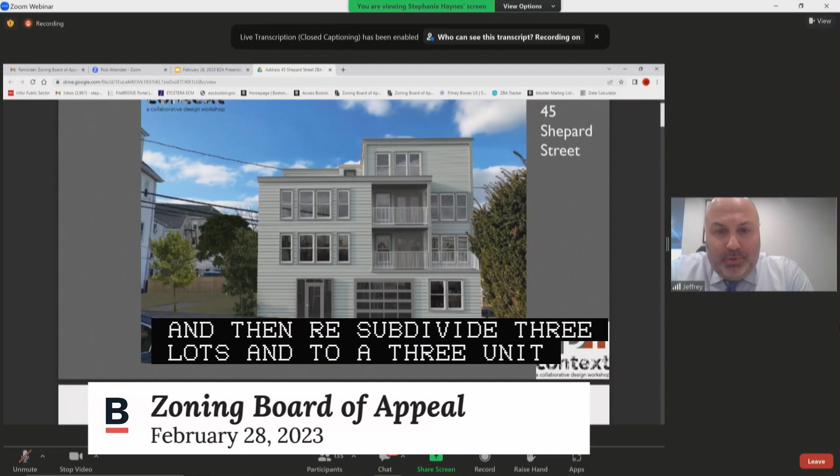What you're looking at is a rendering of a proposal to combine and then re-subdivide 3 lots and to erect a 3-unit residential condominium building at 45 Shepard Street. The unit will contain 3 units, all condo, and 5 interior parking spaces that would go along with those units, all housed on the ground level.

The particular subdistrict is a 2F-5,000. Our lot is 5,014 square feet. You can see some of the surrounding buildings — there's plenty of multifamily from 3s to residential condominiums and rental around us.

Just to get quickly into— this case is actually with a translator, so Mr. Drago needs to pause for translation.

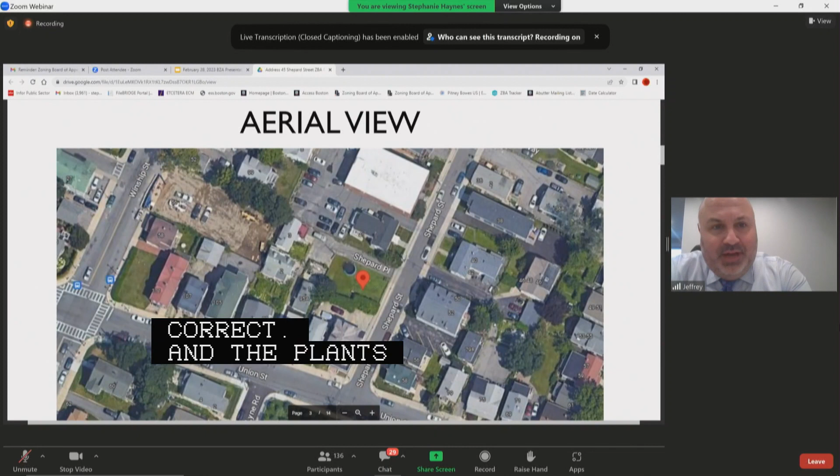The project, Madam Chair, has really been modified over time. We started at 9 and went down to 6, then down to 4, and now with community process are at 3. The plans that were submitted, the final set reviewed by ISD, show the 3 units with 5 parking spaces. Thank you. Okay, excuse me, let Terry translate.

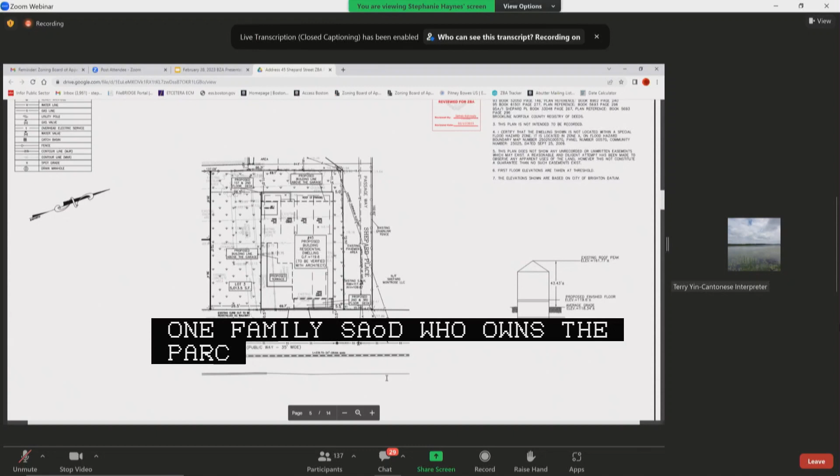If we can go to the next slides, and the next one after this — we now get into the parking area, so you can see 5 parking spaces, 3 full, 2 compact, with a 20-foot turn radius, and an elevator on the ground level.

I think this— Terry, sorry, the other way around: 3 full, 2 compact, Terry.

Is it 3, Terry, full? Yeah, 3 full. Okay, you said 2 full.

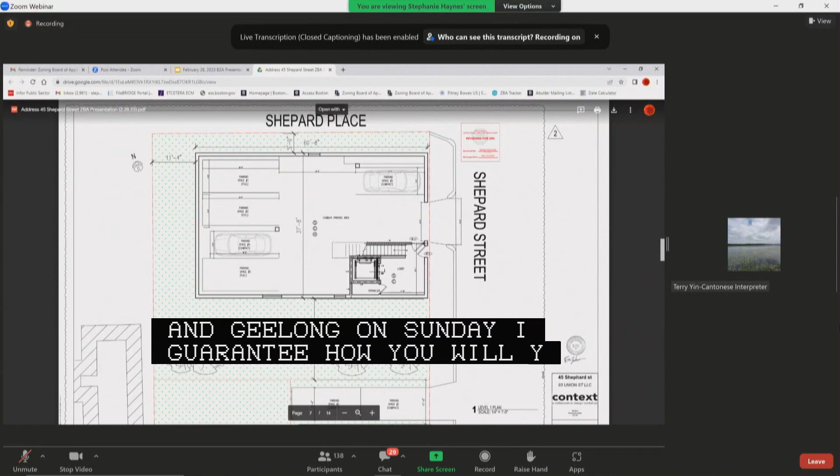3 large parking spots and 2 small ones. It's important to show this slide because as we worked with Councilor Breadon's office in the community, we modified our rear setback to have 11 foot 4 inches and 21 feet on the left side of the property, giving that area as green space.

I'll run through these quickly. The second level houses Unit 1, 1,665 square feet, 3-bedroom with a front deck. As we go up to levels 3 and 4, those are bi-level units housing bedrooms.

On level 3 with a deck, Unit 3's bedroom with 1 deck. Levels 3 and 4 are 2-story units for Unit 2 and Unit 3, each with a deck. Finally, going up to the top floor, through the process we removed the roof deck.

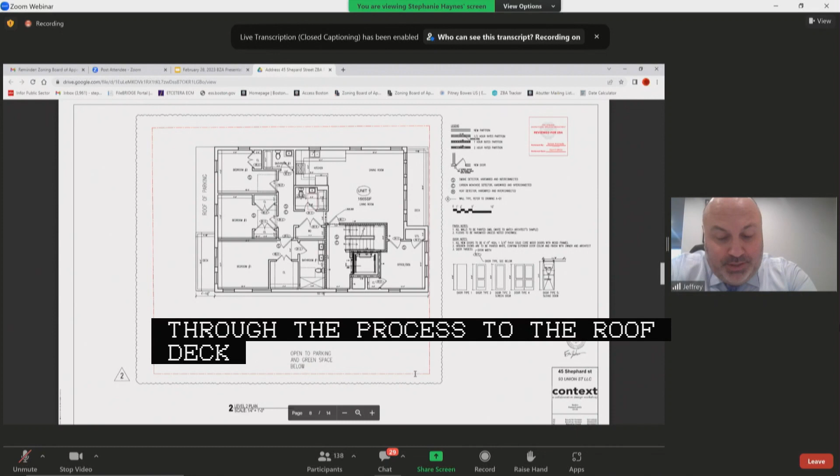Level 4 just has a walkout terrace area, housing Unit 2 and Unit 3's upper level, which include additional bedrooms in those terraces. The 4th floor roof is walkable and usable by Unit 2 and Unit 3. I'll quickly go through the violations, Madam Chair.

This is a 2F district. We are proposing 3 units, although there are plenty of examples of multifamily 3s in the area. This is a 2F zoning district with many multifamily buildings nearby. The FAR allowed in this area is 0.8.

We're proposing an FAR of 1.27. For height, we are at 4 stories at 42 feet 2 inches. We actually lowered that height from our higher point; it was 46 feet going through the process.

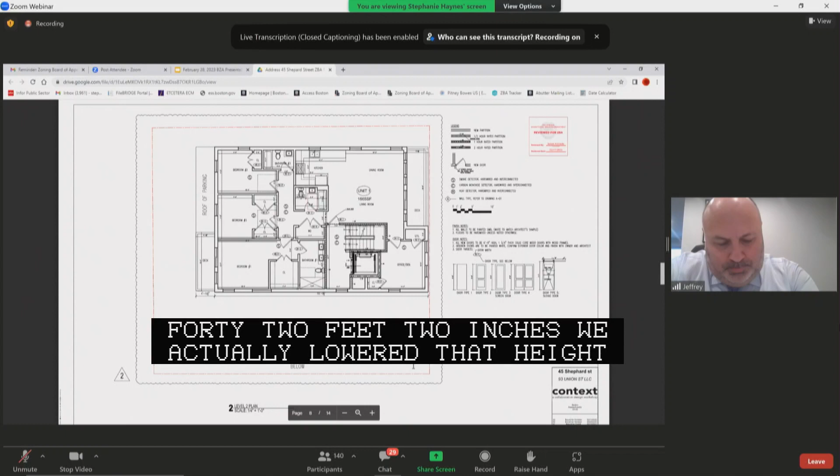Required side yard is 10 feet; we have 5 on one side and 21 on the other, with extra space for greenery. Our rear yard, although 40 feet would be required, is at 11, close to most buildings in the area if not more. We've worked with the councilor's office and abutters to agree to provide full screening and buffering in the rear and sides with landscaping and fencing.

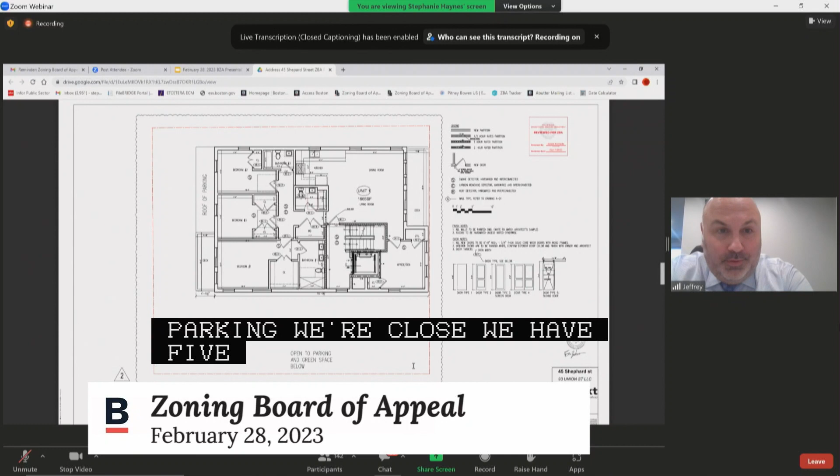The rear yard requirement is 40 feet; we're working with the councilor's office to provide screening, buffering, and green plants in back. Finally, parking: we're close, with 5 spaces for 3 units, but 5.25 would be required under the code. I'll pause here, and I also have Eric Zackerson with me, the architect who designed these plans in context.

Thank you, Mr. Drago. Mr. Collins, have you reviewed the plans?

Sorry, Mr. Collins, do you have any questions about the plans? I do not. Plans are adequate.

Thank you. Is Mr. D'Amico on? Any questions on the parking?

Madam Chair, I just want to confirm the parking is accessed through a front yard curb cut, is that correct? A couple more questions: are these condos or rental? Can you go over access to the roof deck? Sorry, let's let the interpreter translate.

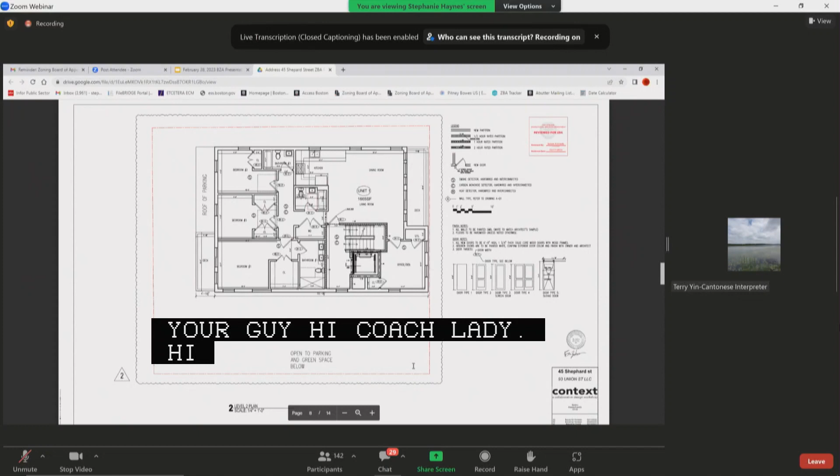I'll take these one at a time. The garage is accessed through a curb cut created in the front of the building next to the main entrance. As for the terrace, since we took the roof deck off, it's just a walkout from the top floor bedroom through an access door. And condos or rentals? This is condo, for-ownership homes.

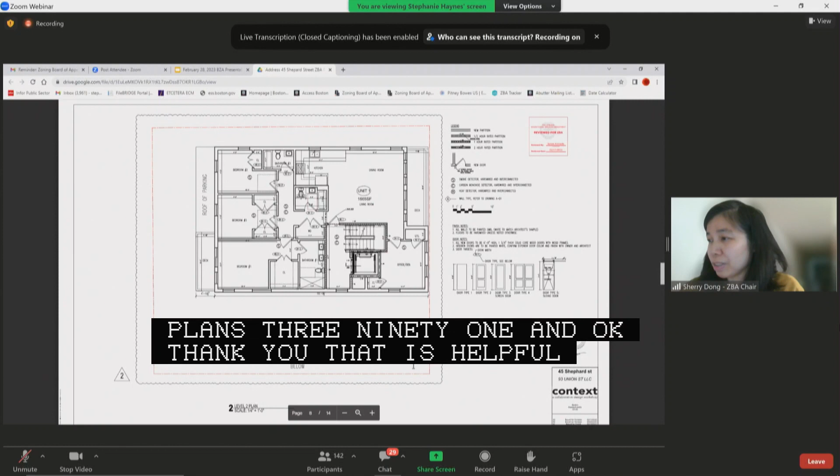I know someone usually asks about BPDA, so I'll note that BPDA provided a recommendation based on 6 units. I don't know if Mr. Hampton is on and wants to comment. Thank you, Madam Chair, members of the board. Yes, our recommendation was made 4 months ago, so obviously over time the plans have changed. It was recommended for denial under the 6-unit plan.

So just to let folks know, that was based on 6 units, and now we're talking about 3 units. Are there any other questions from the board?

Madam Chair, Mr. Drago, I would like to ask if you can share the specific reason why the project lost 3 housing units. Excuse me, Ms. Valencia, we actually went through about a 2-year process.

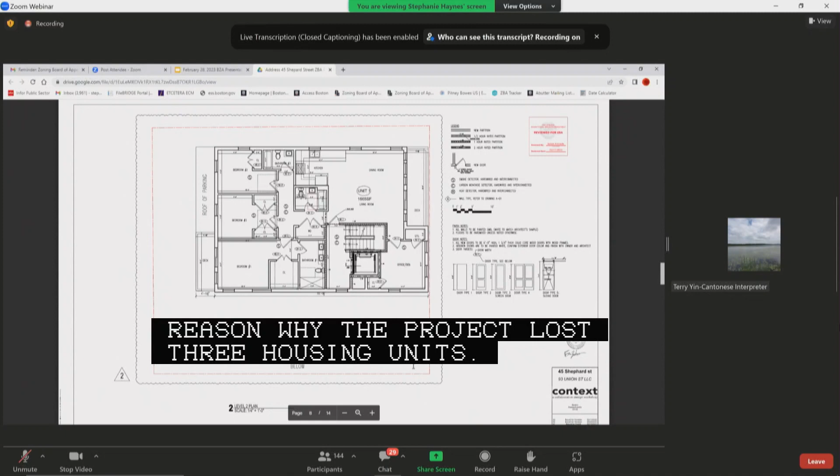I just want to translate. Oh sorry, okay, let me briefly translate.

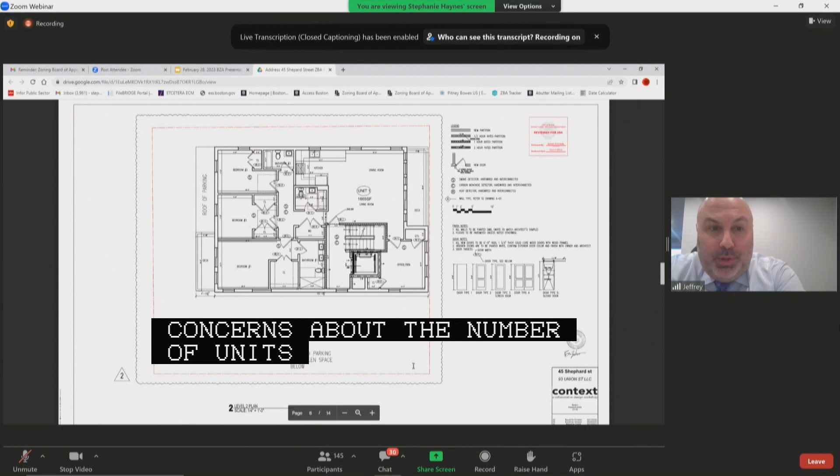Go ahead, Mr. Drago. Thank you. Ms. Valencia, that's a great question. We did want to go forward with 6 units, although we had multiple meetings over almost a 2-year period with our neighbors, abutters, the counselor's office that had concerns about the number of units on this lot. So in working with them, that's why we reduced the project down to 3, which they felt was more fitting to the area. Okay, so with that, may I open it up to public testimony?

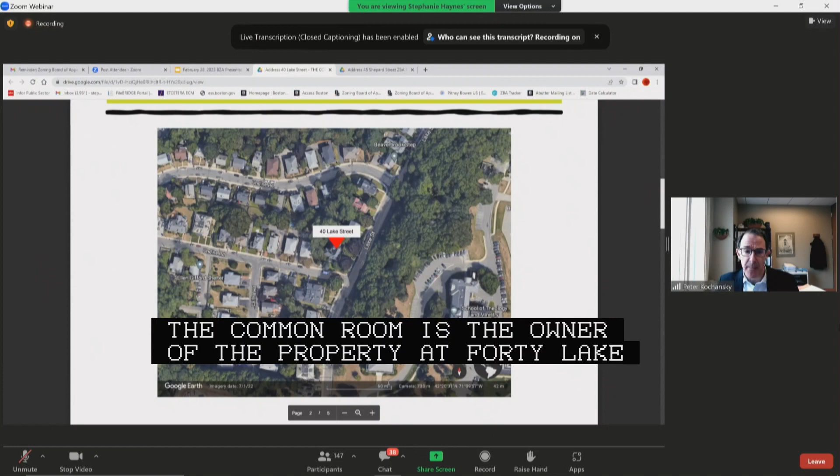Of course, so I'm here representing our client, The Common Room. The Common Room is an organization dedicated to providing social opportunities for young adults with autism. The Common Room is the owner of the property at 40 Lake Street. I'm joined by Tracy Stoll, the executive director, and Tom Harrington, a board member. We're really glad to be here this morning.

We were first before the board on June 7th of last year. There were a number of good questions about the project from abutters and others in the neighborhood. Several neighbors, including Secretary Galvin, who lives right next door on Lake Street, recommended a deferral, and the proponent and the board deferred at that time. Since then, we've worked really hard to answer all the neighbors' questions, primarily around the specific use of the building, traffic concerns, and the approach to parking and drop-offs. Among other things, we hired a transportation consultant, Howard Stein Hudson, to study the traffic generated by the project.

This has been, at this point, a very thorough community process. We've had 3 neighborhood meetings hosted by the mayor's office. We've presented twice to the Brighton Allston Improvement Association and other stakeholders. So after that work and outreach, we think many of the neighbors are a whole lot more comfortable with the project than they were last year. I don't know if Secretary Galvin is able to attend the meeting today, but we understand that we've addressed the issues that he raised to his satisfaction.

So before I proceed, I just want to note that we have agreed to a number of conditions to the zoning relief. I can circle back to those at the end if that's the best way to do it, but I want to make sure we get those on the record. So launching in, if you could flip back to the previous slide. So here's the context: 40 Lake Street is on the corner of Lake Street and Undine Road. It's across the street from BC's School of Theology, and just to the south is Commonwealth Avenue. Next slide, please.

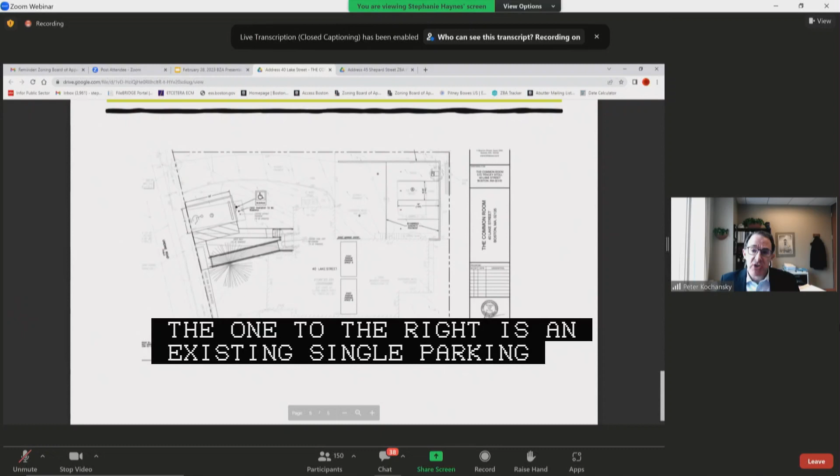Here's the parking plan. There are a total of 7 spaces on the property. There's room for 4 spaces in the back parking area, plus a garage within the house off the back parking area with an additional 2 tandem spaces, which the organization plans to use for the caretaker.

As mentioned, there's that existing single parking space, and the proposal is to modify it to maintain it as an accessible parking space. The change in use requires an accessible route from an arrival point into the building, and the existence of that space allows us to implement accessibility best practices, connecting it to a ramp on the way into the house.

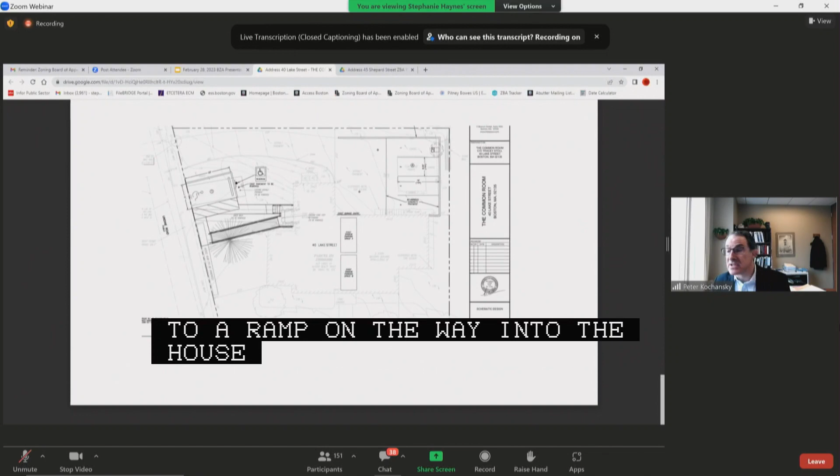We've heard from some neighbors about concerns regarding the ramp design. The common room is still studying it, but in any event, the organization has hired a landscape architect to develop first-rate landscaping plans, with the goal of making that side of the house look terrific.

To summarize, we really don't think this is going to generate any significant traffic or drop-off issues. This is a small organization, and we have the ability to manage parking and drop-off as we go if it causes any concerns in the neighborhood.

Thank you. Are there any questions from the board? I'd also be glad to read into the record the conditions, if that's helpful.

Are there any questions, Mr. Collins? Have you reviewed the plans? I have—plans are adequate. Any other questions from the board? Okay, with that, we can come back to you as needed, but let's take public testimony.

Good morning, Chair, members of the board. My name is Frank Mendoza, Brighton Liaison for the Mayor's Office of Neighborhood Services, here to testify to the applicant's completion of the community engagement process. They met with the Brighton Allston Improvement Association and had more than one abutters meeting.

While we did forward a number of letters of both support and opposition to the board, I'd also like to note there were some concerns with pickup and drop-off, and concerns about the handicap ramp as configured, particularly that it might remove trees and shrubs existing on the plot. Residents also hope the building will fit in with the character of the residential neighborhood. I know Annabella Gomes from the Brighton Allston Improvement Association is on and would like to testify. With that, we will defer to the judgment of the board.

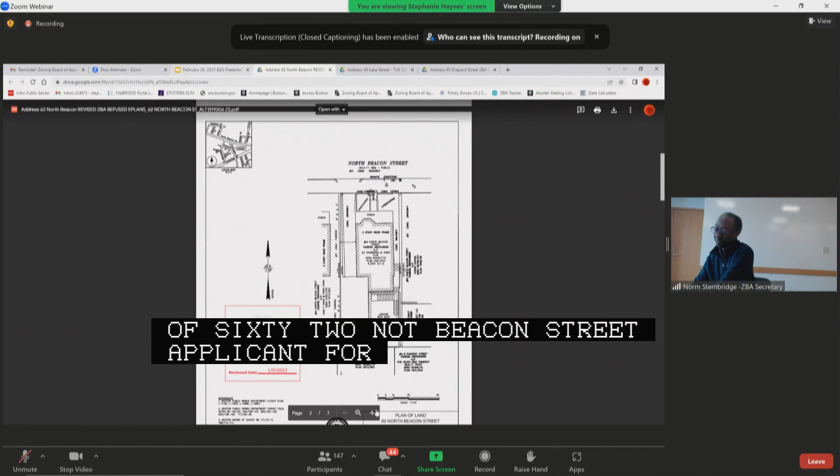Yes, applicant is present. Can you hear me? Yes. Can you please state your name and address? Yes, my name is Amenyonah Bossman. My address is 14 Stonecrest Road. I'm the general contractor for client at 62 North Beacon Street.

Okay, briefly walk us through the violations and the proposal. Thank you. So the violations, and we were just meeting here last year, so the violations that we had were the height, and there was questions on whether or not we had a second egress door, as well as the ceiling height in the ground floor level.

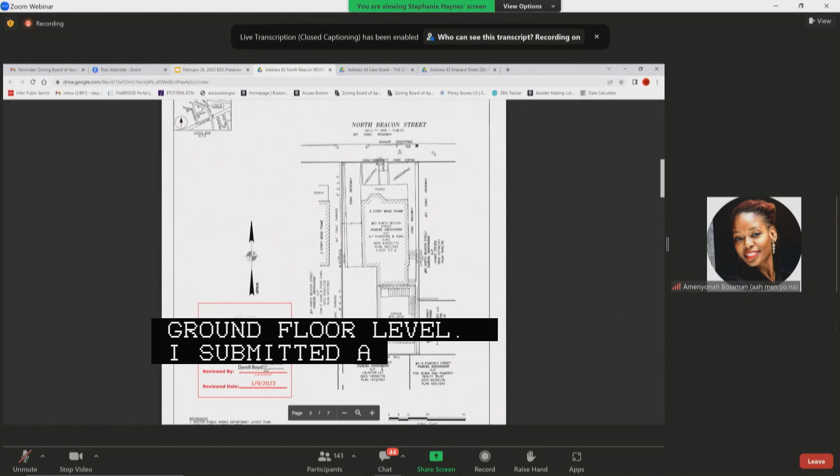I submitted a set of drawings in December, providing the clarification on ceiling height and egress door. We met back with the community, did some revisions, and so the new drawing shows, instead of an additional dwelling unit, which was at the ground floor level, that's now a 1-bedroom handicap accessible unit.

There is clarification, if you can see. Oh, I can't zoom in, okay. There's clarification on the ceiling height, which is 7.6.

You'll also see on the second drawing, you're in the demolition drawings right now. If we go to the plan, the red clouded area is what we had in question for the last meeting. What you're looking at, if you zoom in, you'll see there's a utility room and there's two forms of egress.

One is the entrance on the side that you see going into the foyer where you'll have access into the utility room, or you'll have access into the ADA unit. And if you go around the back, you'll also see a secondary egress access.

What was added is the excavation for the ground floor, and that's where you see the concrete. That's the concrete patio along with the handicap rail.

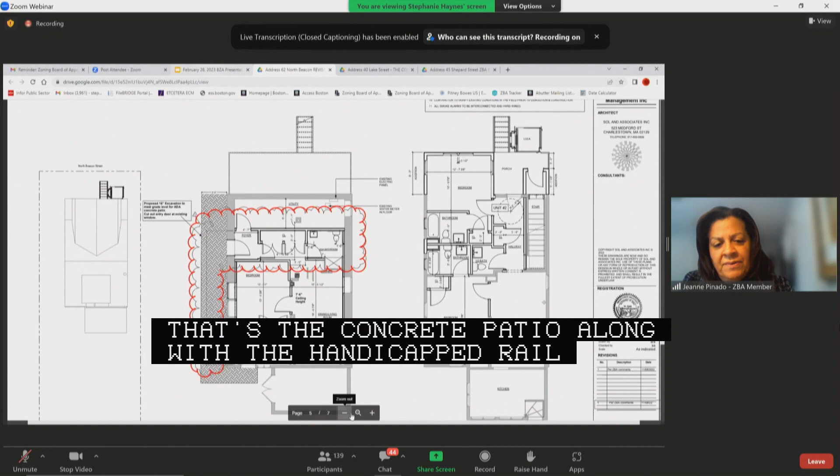Madam Chair, can the applicant just go over the variances, what's required and what's being proposed? Yes, that would be helpful. We don't need a rundown of the entire, all your slides. Can you please focus on the variances needed?

The applicant is muted. Yeah, sorry about that, I had some background noise. So the variance that we're looking for is to add the ADA ground floor unit. We're citing FAR, multifamily use, forbidden off-street parking, loading.

Can you address those violations? So the multifamily uses, we're in a single family residential district. We're asking for the variance to build the single family into 4 units.

We covered parking there. We have a driveway for parking, and there's also street parking. We do not expect to add additional parking issues on the street. Are these condos or rentals? These are rental units. And how many bedrooms are we talking about per unit? We're talking about roughly 3 bedrooms per unit.

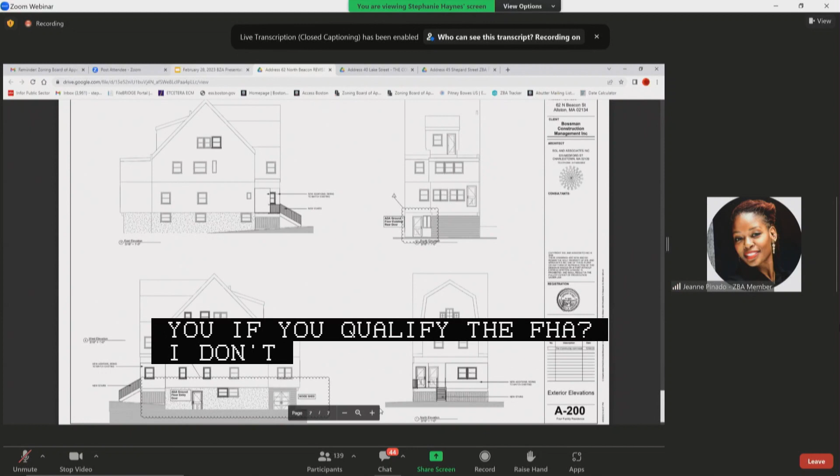Can you address FAR? Can you clarify the FAR? I don't have my paperwork with me. No. Just clarify what's required and what's being proposed. What's required? And what's being proposed, yes. What's being proposed is a single-family conversion to a 3-family unit.

She's asking about the FAR violation. Your floor area ratio, so what's the square footage of the building, the livable square footage in the building? Let me pull up my drawings, because it's not shown on yours.

Is it on the plan someplace? Yeah, it's on the plans. I'm just looking for it. Hold on a second. So are you building out the basement and attic as well as livable space? We're not building out an attic.

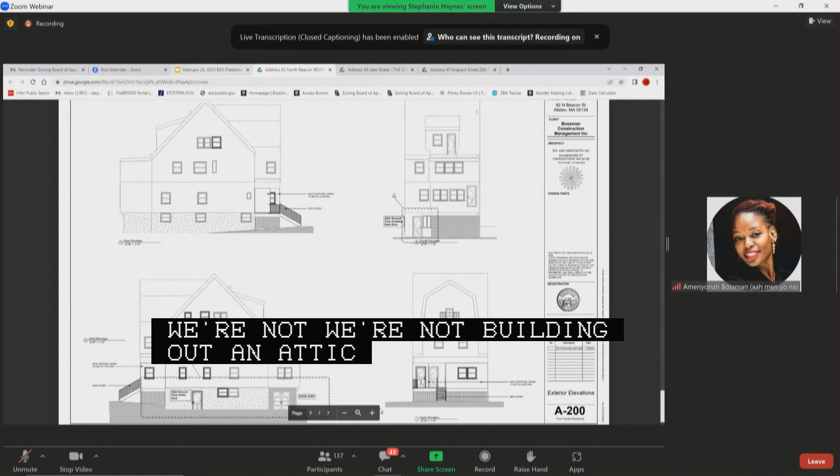Okay. But what I have, the violations, yeah, I see the off-street, I see the forbidden use and the floor area ratio. We didn't have any violations on the FAR, but I'm looking to see where it's located in our drawings.

So I think we had some notes on it. Well, it's noted as a violation. That's why we're asking. Yeah, so it looks like 4,000 square feet is your FAR, your square footage. And your, hang on one second. What size is your lot?

Hang on one second, it's just gonna take me a second to bring it up, but it's one family, 3,000... I think the question is, can the applicant respond to that? Oh sorry, well I had all this stuff already on the drawings, so I'm just trying to go through my drawings. Madam Chair, if I may, an allowable FAR for that zoning district is... that would help us, I think.

So 0.5 is what's allowed. And what are they at? So right now I'm looking at 4,000 square feet. So yeah, your allowable square footage would be 2,000.

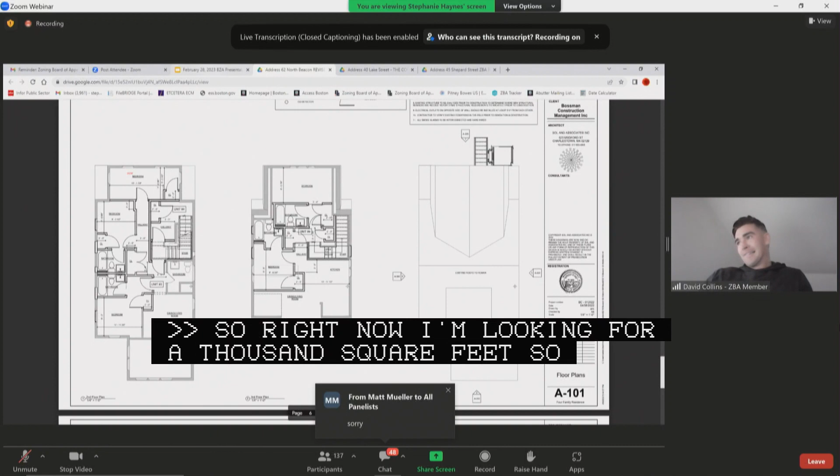Does that answer your question, Ms. Pinado? Yeah, it sounds like you're proposing 4,000 square feet, your allowable square footage is 2,000. Is that right? Well yeah, but I'm also looking at the survey drawings. It looks like the existing is 4,000 square feet.

Okay, so this is an existing building, we're just actually going into the basement. Correct. So if you look at the survey, it's existing precondition. Okay, I get it. We are not adding an inch in the building. It is the existing building which we are just converting the floors into units.

That's all. So you're converting it from a one family to a four family? I got you, right, because there's 3 different levels. Okay, and that's according to the city's website, they have almost a 3,000 square foot house now.

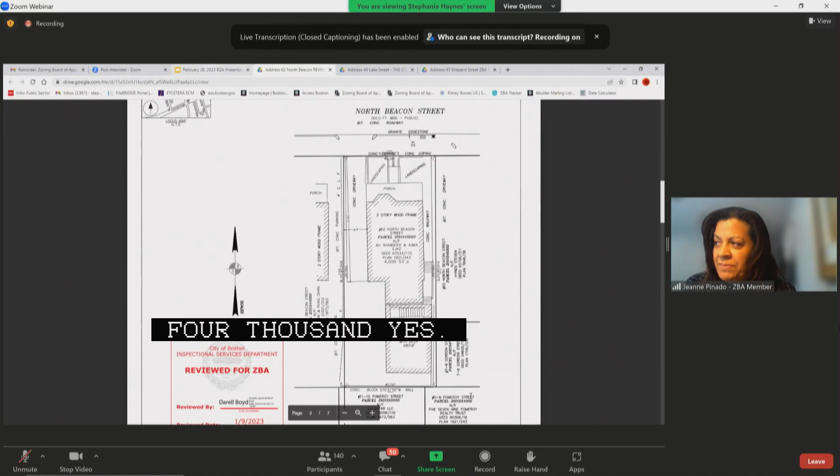And it's a walkout, it's accessible basement, so it's actually a roll-out basement unit? Yes, it is. It is actually not a basement, it is on the ground level. Okay, right, okay, all right, thank you.

Thank you. Just to add, we have already covered 3 parking areas, 3 parking garage. A 4th could be converted, but we are using it as a utility room, and we have our own driveway, and at least 4 car parkings in the driveway.

Mr. Stembridge, any notes from Mr. D'Amico on parking? On this case, Madam Chair. Okay, may I have public testimony?

Yes, absolutely. Good morning, Chair, members of the board. Frank Mendoza here, Mayor's Office of Neighborhood Services, Allston Brighton Liaison. We did have an abutters meeting for this project. They also reached out to the Brighton Allston Improvement Association, but did not wind up being able to testify before them. As a result, the Brighton Allston Improvement Association, represented today by Annabella Gomes, I believe, and the participants voted to oppose the project. They did also do some outreach with the Allston Civic Association. However, citing a lack of proper notification, the Allston Civic Association sent a letter this morning to the board stating that they would defer to the judgment of the board. Beyond that, we would like to also defer to the judgment of the board in this matter.

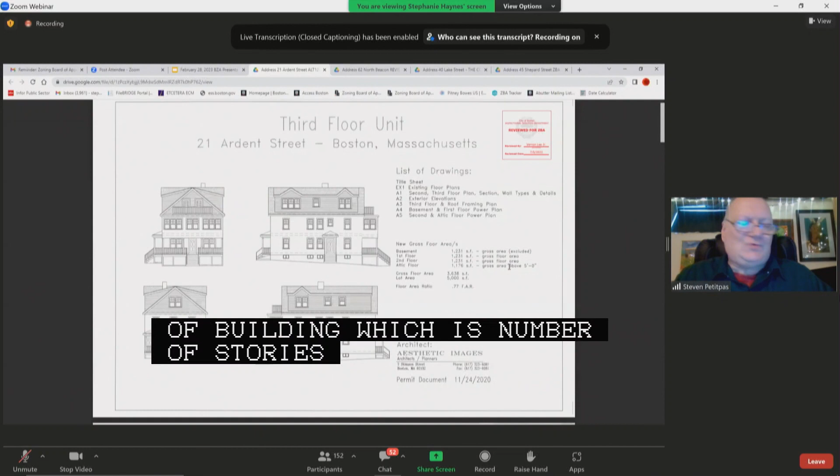The violations for this particular project are floor area ratio, height of building, number of stories, front yard, side yard setback, and off-street parking. This is an existing 2.5-story non-conforming two-family building. The side yard and front yard setbacks are existing. The project is not going to further violate that.

We are proposing to take an existing unused attic space and convert it into a third unit, thereby increasing the floor area ratio by 1,176 square feet, which is really an actual increase of 500 usable square feet in comparison to what's there now. In addition, all 3 units will have separate entrances.

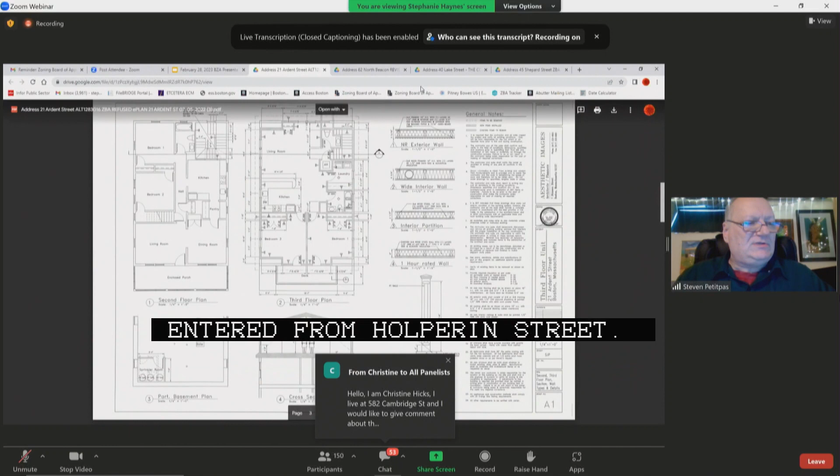First floor is entered from Ardent Street, second floor is entered from Colberg Avenue—those are the existing units—and the third unit will also be entered from Colberg Avenue. In addition, the off-street parking currently is 2 parking spaces. We're not proposing to increase that because we just don't have the physical land area to do so.

Any questions? Mr. Collins, have you reviewed the plans? Yes, I did. Plans are adequate. Okay, any questions from the board?

So just to confirm, there's really no external changes, it's interior. Well, for the existing 2 units, there are no internal changes. We are providing a third floor unit. Right, I'm saying there's no external changes. Oh, yes, there is. We're providing dormers at the attic level in order to create that third level. That's where the additional 500 square feet of usable space comes from.

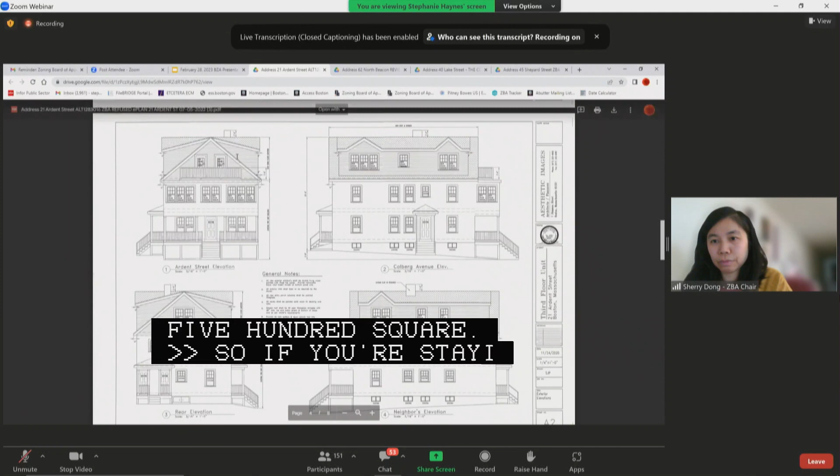Okay, any other questions from the board? Okay, may I have public testimony? Yes, Madam Chair, members of the board, Connor Newman with the Mayor's Office of Neighborhood Services. At this time, the Mayor's Office would like to defer to the judgment of this board.

Some background information on the community process. Our office held 2 abutters meetings. During the first meeting, there were some concerns over the loss of sunlight from the dormers, as well as concerns about parking. As I indicated, we had a second meeting where 2 direct abutters were in attendance, and it sounds like that meeting was very productive.

We've received 16 letters of support and 1 in opposition, and it's been indicated to us that direct abutters are mostly in support of this project. With that, we defer to the judgment of this board. Thank you, Mr. Newman. Madam Chair, Mr. Stembridge, yes, we have letters both in support and opposition to the project.

Madam Chair, I have no raised hands. Okay, with that, may I have a motion? Motion to approve. Sorry, go ahead. Motion to approve with BPDA design review. May I have a second? Second. Mr. Shepherd? Yes. Mr. Valencia? Yes. Mr. Stembridge? Yes. Mr. Collins? Yes. Ms. Panado? Yes. Ms. Olivier? Yes. The chair also votes yes, motion carries.

Good luck. Thank you.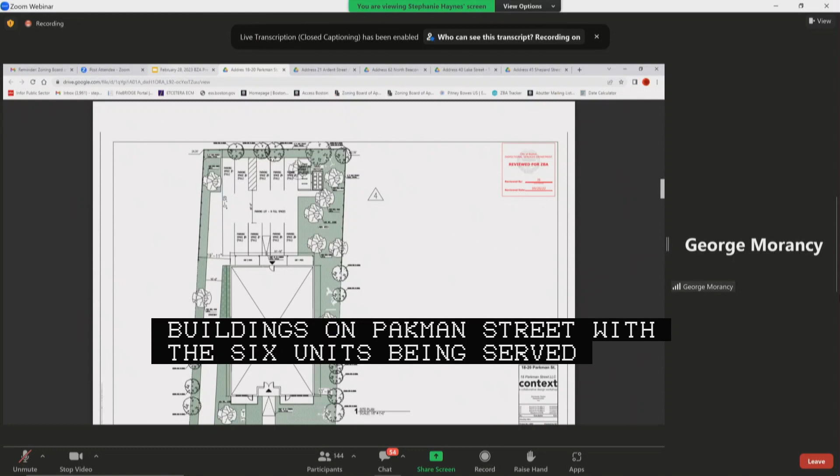with the 6 units being served by rear parking area for 9 motor vehicles. In response to concerns expressed at community meetings dating back, I believe, to 2019, my clients have gradually reduced surface parking and reduced the proposed unit count from 14 to 9 and now to 6, and increased usable open space on the site as a result.

There's now a few thousand square feet of true green open space on the site plan, as well as approximately 1,000 square feet of unit deck and patio space for the 6 proposed units.

As I mentioned, the site is nearly 15,000 square feet. As plans show, there's a 13-foot, 4-inch front yard setback with a landscaped lawn, a left side setback of 19 feet, 11 inches, a right side setback of 13 feet, 8.5 inches, and a rear yard setback of 65 feet.

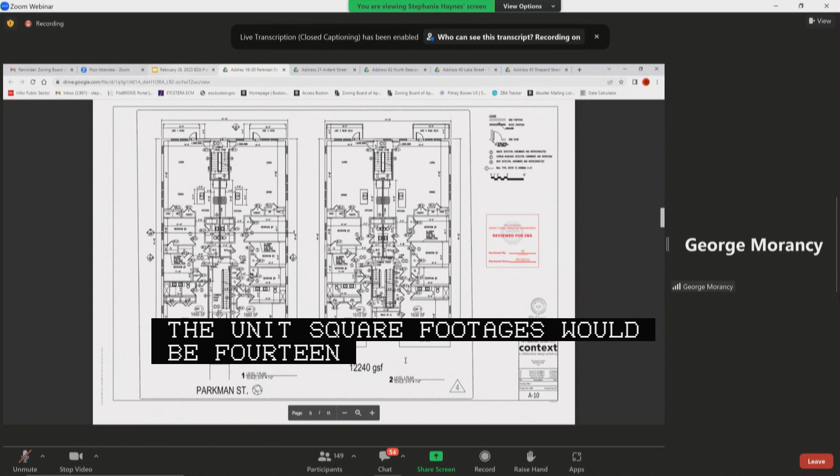Each floor of the building would have 2 side-by-side units, one being a 3-bedroom and one being a 4-bedroom unit, making these condominium units ideally suited to families. The unit square footages would be 1,490, 1,510, and 1,600 square feet for the 3-bedroom units, and 1,880, 1,930, and 1,930 again for the 4-bedroom units.

As to the requested zoning relief, there are 4 cited violations. Primary among these is the use violation, as a 6-family dwelling is a forbidden use within this 2F 6000 subdistrict, which is the present site here of a 3-family dwelling.

There's also a violation for excessive floor area ratio. The maximum FAR here under zoning is 0.4, and this building would be at 0.81.

A mitigating factor in support of these requested variances is that the lot size here, at nearly 15,000 square feet, is one of the largest lots on this street. Aside from the Jehovah's Witnesses Hall at 29 Parkman Street, it is by far the largest lot on the block. 85% of the other lots on the block are no more than half the size of this lot.

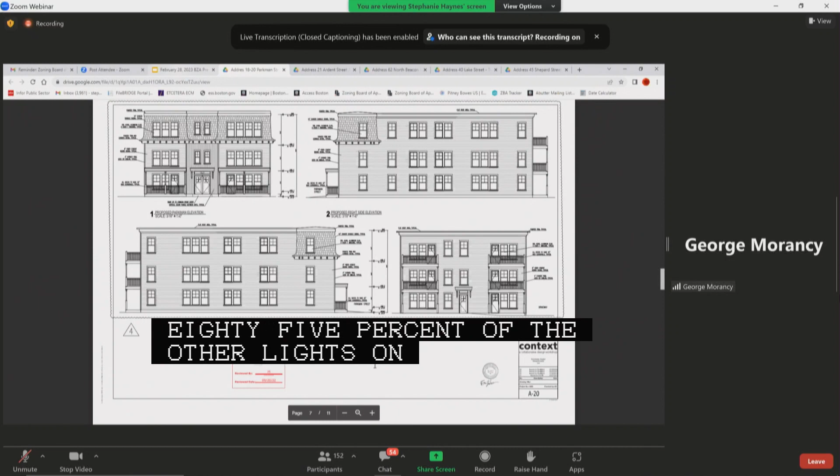Despite its large size, most of the lot will be uncovered by the proposed structure, and the proposed parking area has been reduced to a reasonable count of 9 spaces for 6 units.

There's a cited height violation. The height limit here is 2.5 stories and 35 feet. This building is 3 stories and 33.5 feet tall. So this is a story height violation only, with the building being approximately 2 feet under the maximum vertical height limit under zoning.

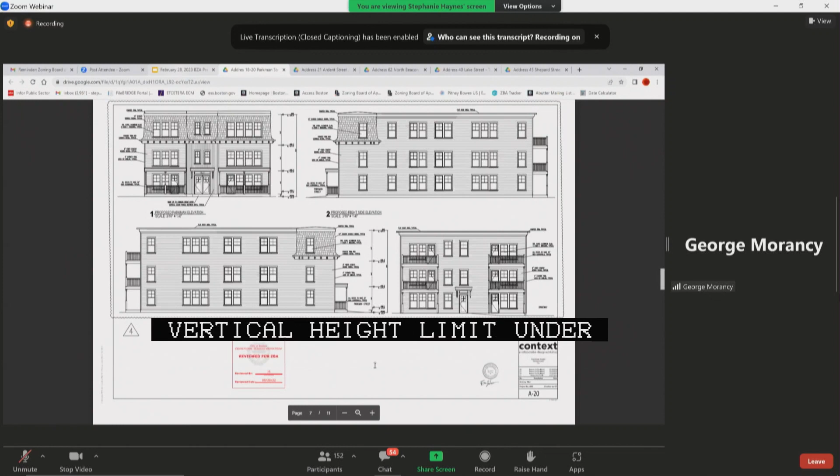Finally, the 4th cited violation is for compliance with the prevailing modal front yard setback of the street. This building's setback from Parkman Street was designed to complement the setbacks of the nearest buildings on both the left and the right, and as mentioned, allows for a generous landscaped front yard area over 13 feet in depth.

With that, Madam Chair, I'll pause and take any questions that board members may have.

Thank you. Mr. Collins, have you reviewed the plans? Any questions or concerns? Mr. Collins? Any other members of the board with questions?

No, the plans are adequate. I have reviewed them. Any other questions from the board?

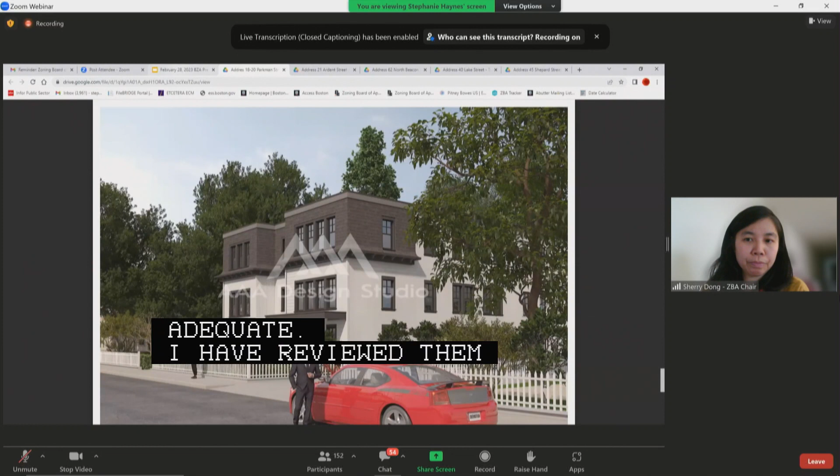Madam Chair, I have a raised hand. Okay, with that, let's take public testimony.

Okay, Brian, go ahead and state your name and address, please. Hi, Brian. Brian, are you here to speak? Oh, I'm so sorry, I need to fix the name. I don't know why it always changes my name. But my name is Ayemide.

Sorry, real quick, my name is Kevin Tran from the Mayor's Office. Good morning, Madam Chair, members of the board. Kevin Tran with the Mayor's Office of Neighborhood Services.

This project has gone through multiple iterations the last 3.5 years and through 3 abutters meetings hosted by our office, decreasing significantly from its inception at 14 units to presently 6. We have received letters of support from members of the Dorchester community for prior proposals. The Fields Corner Civic Association has written a letter of support for the project. The St. Mark's Area Civic Association has written a letter of opposition. There are numbers of abutters who have signed a petition in opposition, and also a number of abutters in support. At this time, our office will defer judgment to the board.

Brian, go ahead. Sorry about that.

No worries. Good morning, Madam Chair, members of the board. My name is Ayamide Owoyo from the Office of District 4, Councilor Brian Worrell. And in regards to 18 to 20 Parkman Street, with 52 gathered letters of opposition and no significant changes, the council would like to go on record deferring to the discretion of the board on this particular project.

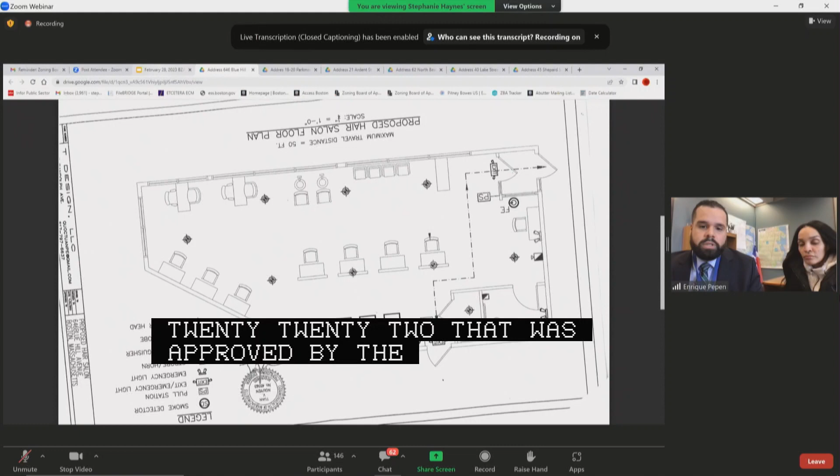The project here is changing the occupancy to a hair salon at the referenced address. The applicant is the owner. She's gone through the process, has the plumbing permit, the electrical permit, and also received a letter of support for a temporary change of occupancy back in November 8th of 2022, approved by ISD. This used to be a Metro PCS store, and she's converting it into a hair salon. She's not changing anything on the outside, and as you can see, this is the layout of her salon.

Thank you, Mr. Pepen. Any questions from the board? Seems pretty straightforward. May I have public testimony? Yes, Madam Chair, members of the board, Connor Newman with the Mayor's Office of Neighborhood Services. At this time, the Mayor's Office is unaware of any concerns in the community. We'd like to defer to the judgment of this board. Any other raised hands, Francis? No raised hands, Madam Chair. With that, may I have a motion?

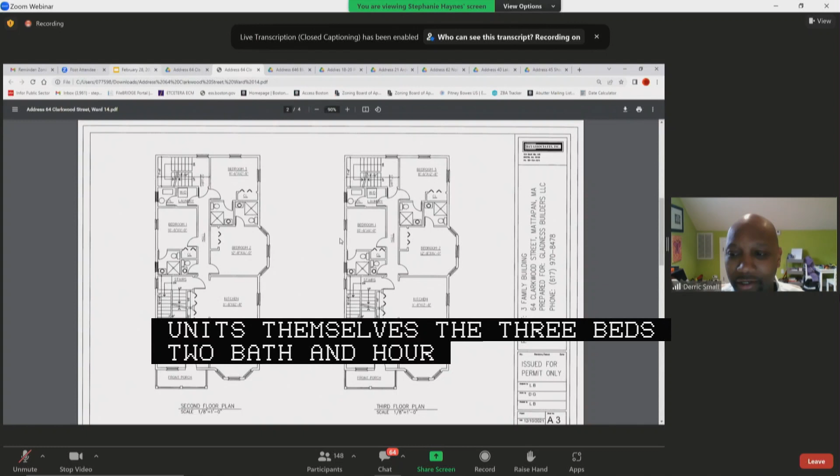Thank you, Mr. Small. Any questions from the board? All right, with that, may I have public testimony?

Good afternoon, Madam Chair, members of the board. The applicant for 64 Clarkwood held an abutters meeting on September 27th, 2022, with 16 total participants in attendance, with 13 abutters present, with the abutters expressing support. There have also been numerous expressions of opposition. The Greater Mattapan Neighborhood Council is opposed.

Well, they were initially opposed, but they have since updated to be in support with the following provisos: the applicant's development team has worked with the direct abutters to address significant concerns resolved during a review of construction management plans. The abutters, with the support of the GMNC, will work closely with the designated general contractor to address concerns that will significantly affect the health and quality of life for the direct abutters if not managed judiciously. They believe that with the agreements made on 2/27/23 with the direct abutters, the proponent will adhere to the reviewed concerns of the CMP review, construction hours, excavation, noise, dust, rodent control, and all of that.

So as of now, I believe they are in support with those following provisos, and we do have 2 letters of support, 1 letter of opposition. So as of now, the mayor's office would defer to the judgment of the board. Thank you. Any other raised hands, Francis?

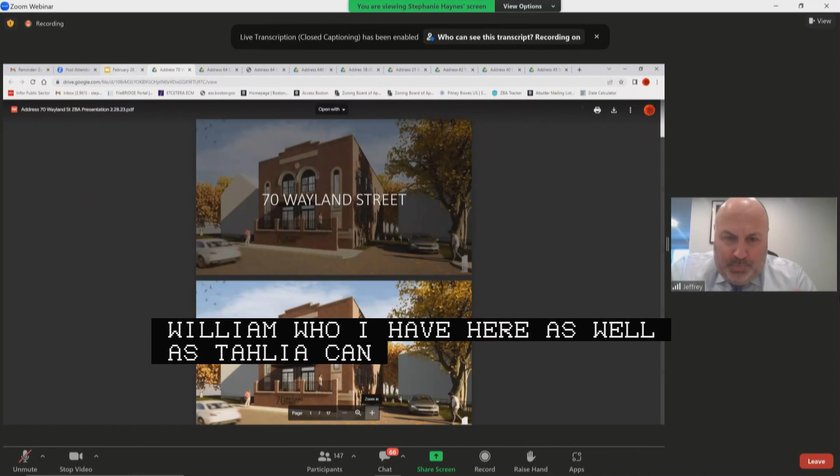Thank you, Madam Chair, members of the board. Attorney Jeff Drago with Drago and Toscano, business address of 11 Beacon Street, here on behalf of the applicant of 70 Wayland, the owner Willie Mandrell, who I have here, as well as Talia Canistra, who's the architect on the project. What you're looking at is an existing structure at 70 Wayland Street.

This is a former church building, the Little Zion Church of God, that was decommissioned. They no longer use this as a congregation. My client purchased it, and the proposal is to keep the existing structure, so there'd be no work except to clean up the exterior, but to build everything inside the building. This would be converted from a church to 6 residential condominium dwelling units, and create 2 parking spaces on the left side of the building.

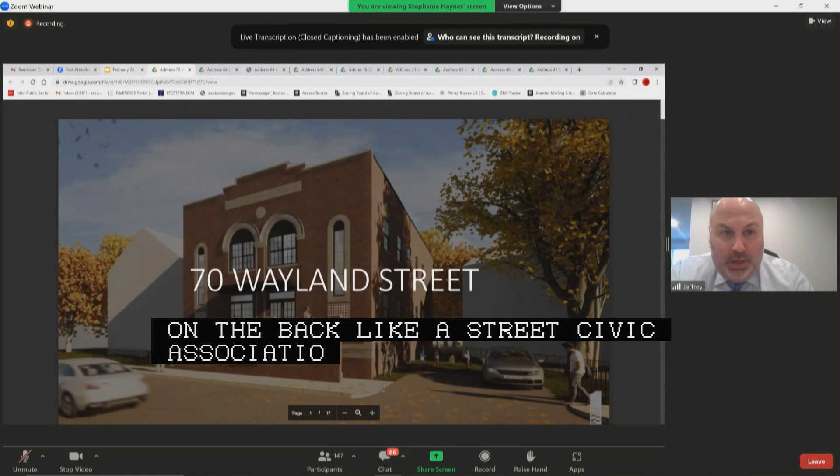As we worked with both Project Pride, as well as the Howard Ave and Magnolia Street Civic Association, there were 2 points they asked of us. One was to keep the existing structure as is and work within the building. The second was to create some form of parking. Originally we did not have parking; we created that as we went through the community process.

The lot size is 5,243 square feet. If we could go to the next slides. This particular zoning district is a 3-family 4,000.

Just to go over the layouts of the structure, we would be utilizing the basement, which has 10-foot ceiling heights. Those would house the bottom level for units 1 to 4 with a living area, kitchen, and 1 bathroom, no bedrooms in the basement.

As we go up to the first level, that would house the lobby, mailroom, and units 1 through 4, and bathrooms. Then as we go up to the second floor, that would house units 5 through 6. Units 1 through 4 are bi-level units, and units 5 and 6 are both single-level units on the second floor. The gross square footage is 8,154 square feet of the existing structure.

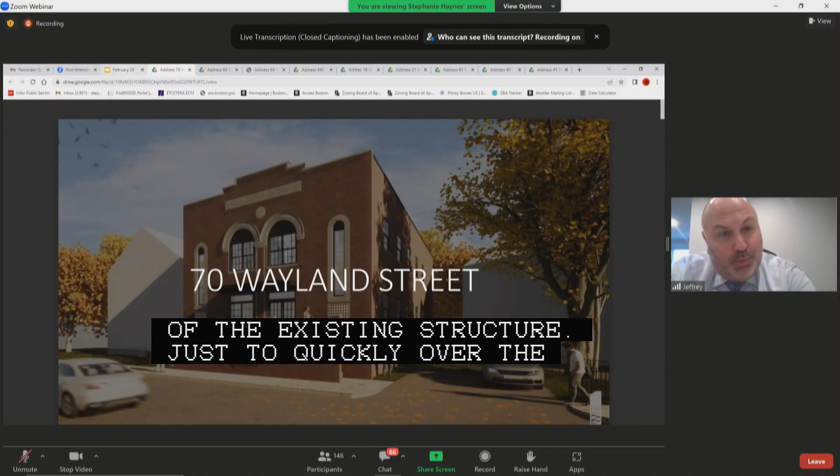Just to quickly go over the violations: 1, this is a 3F district, and we're converting to 6 within the church. So we do have a use variance, additional lot size, open space, 1,200 square feet is what we are providing. I don't know if we can go into some of the slides, but...

You can see there is a grass area. If you go a little bit further to the next slides, there is still some open space that we're able to preserve. That's a good aerial view.

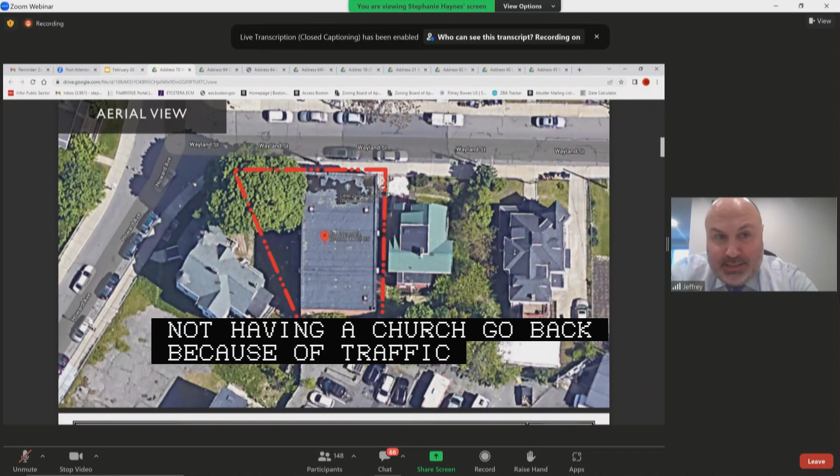We also, in terms of parking, because we're keeping the building, we could not create any additional parking besides the 2 units, but we did try to accommodate the group and the abutters. There was a lot of concern about not having a church go back because of traffic concerns, parking that happens on the weekend. So folks did ask us to make sure we kept this residential. I can pause and answer any questions the board may have.

Thank you, Mr. Drago. Quick question on the parking: will you be creating a new curb cut, or is there an existing one? So we'd be creating a curb cut on the left, on the front of the building. And so even though it says front yard use, it really is the side of our existing structure.

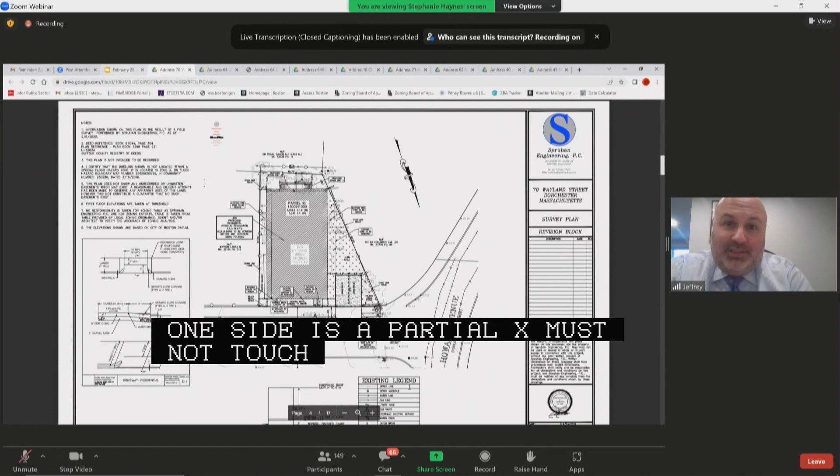Okay. And would you have to remove that existing tree at the corner of Wayland in order to create parking? So there's actually, if we go to the next slide, that's the site plan, there's 2 trees, sort of sprouts. One side is on the parcel next to us, we would not touch. We're gonna try to keep that remaining trunk as best as we can. If for some reason we can't, we agreed that we would plant another tree in its place.

Okay, thank you. Any other questions from the board? The usage for the basement, how will it be used? So that's going to be bi-level units. Right now that was existing church space, so that would be converted to have storage for the units, living area, kitchen, and 1 bathroom for those units.

Thank you. May I have public testimony? Just a note, there is a letter of support. Thank you. And Ms. Santana?

Good morning, Madam Chair, members of the board. Keisha Santana with the Mayor's Office of Neighborhood Services. An abutters meeting was held on August 9th and October 11th.

Abutters expressed concern for parking and lack of parking in the area. There were concerns with congestion. In the second abutters meeting, more parking was presented, and there was not as heavy attendance as in the first meeting. They met with local civics where similar concerns were expressed. Members of the Blue Hill Ave, Quincy Street, Howard Ave, and Magnolia Street Neighborhood Association and Project Pride wrote a letter of support under the condition that the applicant meets with them regularly during the construction phase to address issues.

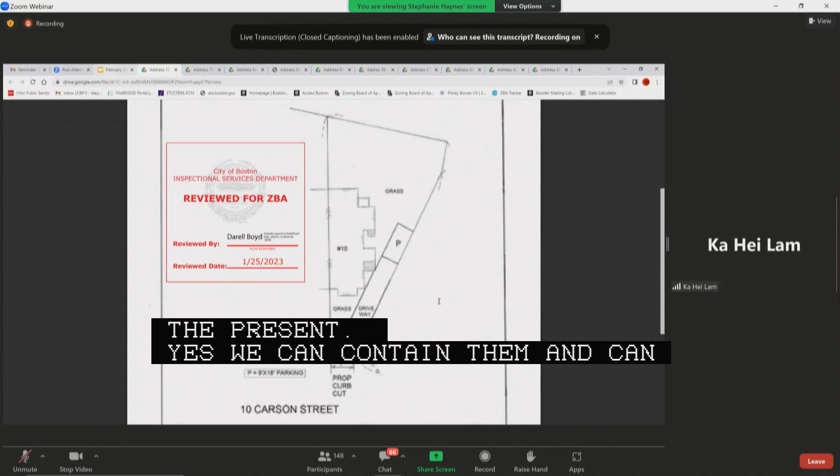Can you speak up, Ms. Lam? Thank you, can you hear me? Yes, thank you. My name is Ka Hei Lam. I'm the daughter of the 10 Carson Street house owner, and this is a single house, and it is owner occupied.

So we made some changes on the new plot plan compared to the old one, since we discussed last time that front yard parking is not allowable, and hence we moved the 1 parking space to be next to the house. The triangle-shaped lawn on the left-hand side of the front yard will still be kept there, and the paved material will still be paver stones, so the water flow direction issue can be solved. And when you see the house on the Google map, the front stair was cut a little bit during the renovation in June 2021, so space should be enough for a car to get in.

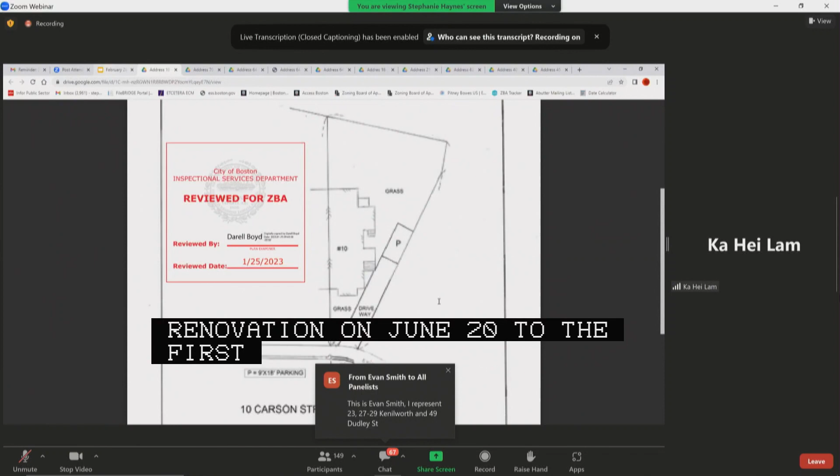And also the trash storage can be moved away too, but we measured the length of my car and also the space, and it is enough for my car to get in. Okay.

BTD is not on this call. Mr. Stenbridge, does BPDA have a recommendation? Yes, he does, Madam Chair, and his recommendation is to deny the proposal. Any questions? Is it basically to reduce it from 2 cars to 1 car for parking? Yeah. Okay, thank you.

Mr. Collins, were you about to say something? Yeah, the drawings are inadequate. I can't see any of the dimensions on the drawings. Everything's blurred out. So I don't know the setbacks to the building, I don't know the size of the curb cut, I don't know how much room there is. Got it, thank you. Other questions?

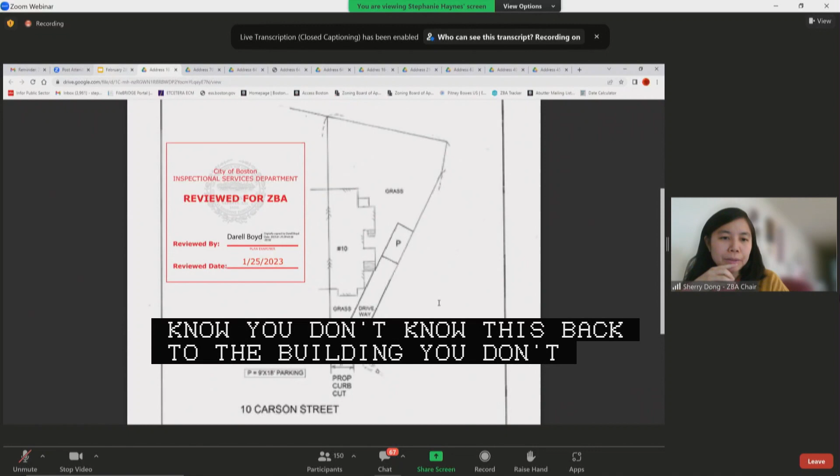Honestly, there's not a lot there. And I know Mr. Tavico said to reduce it to 1, we recommended denial because if they have a 10-foot curb cut, you only have 1 parking space. And it's literally going to be in the front yard of this semi-attached dwelling. It's a crazy lot to begin with, but it's very, very difficult to fit cars in this area.

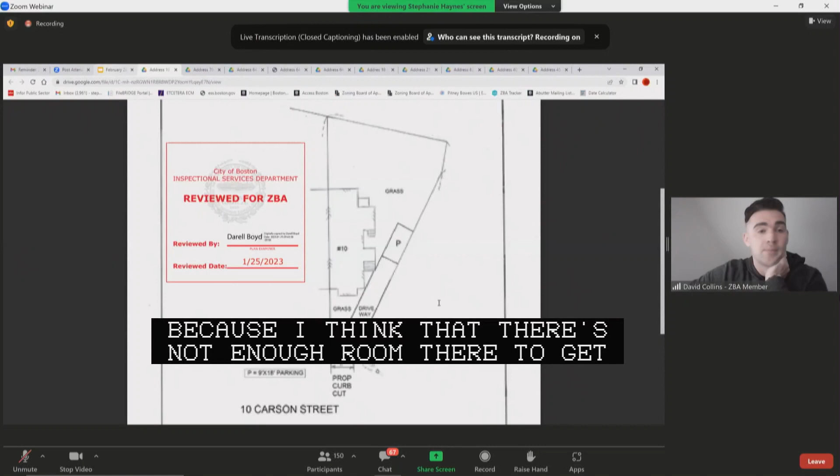Yeah, even looking at the zoning map, in the live view, you need to at least see a dimension between the house and the abutter's lot, because I don't think there's enough room there to get a car. The stairs are going to make it very difficult to get more than 1 in there. And typically, the city and this board have not supported the privatization of an on-street parking space. We can always ask for at least 2 if you're going to have a curb cut.

Any other questions from the board? Okay, may I have public testimony?

Good morning, Madam Chair and members of the board. My name is Ross Cochran with the Mayor's Office of Neighborhood Services. The applicant has completed their community process. Our office held an abutters meeting in January of 2022 where abutters supported the project so long as a rain drainage system was installed. The local civic association supports the project and has written a letter of support on file.

At this time, we'd like to defer to the board's judgment. Thank you. And Ross, to confirm they're supporting for 2 parking spaces? Yes, I believe so. That was what was emailed.

Thank you. Any other testimony? Francis? No raised hands, Madam Chair. Okay. Any other questions from the board?

Okay, may I have a motion? I'll motion to deny with prejudice. I need to see more on the drawings, so they can come back again. Madam Chair, not with prejudice. Without prejudice, they can come back. Sorry, I misspoke, without prejudice. If they can show me that there's enough room there for a car to get through, then I don't see it being an issue. Okay, so basically you need the actual dimensions.

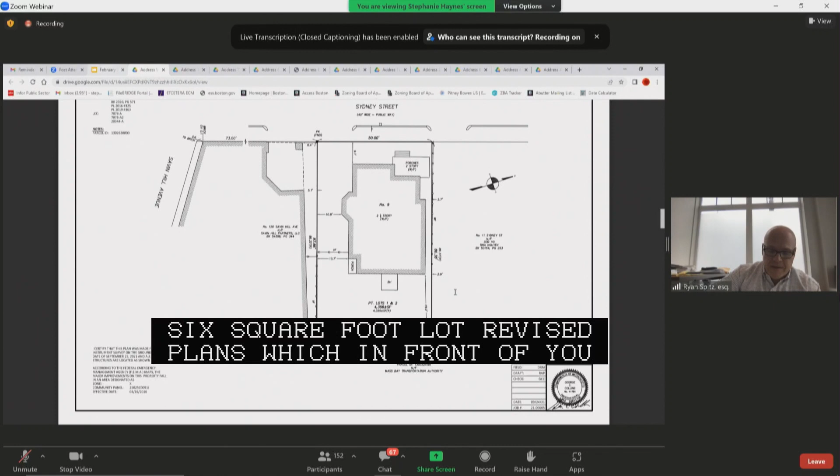This proposal seeks to raze the existing structure and erect a new 5 residential unit building with 5 parking spaces at grade on approximately a 4,356 square foot lot. Revised plans, which are in front of you today, have been reviewed by a plans examiner and have been signed and stamped today. This proposal is located within a 1F 3000 subdistrict.

However, the density of this building is in line with the other recently approved neighboring projects, from across the street to the abutting building on the right. Further, this location is directly across the street from the Savin Hill train station.

The first floor will consist of Unit 1, a one-bedroom, approximately 663 square feet. The second floor will consist of Unit 2 and Unit 3, both containing 2 bedrooms, Unit 2 approximately 879 square feet and Unit 3, 949 square feet. The third floor will consist of Unit 4 and Unit 5, both containing 3 bedrooms, with the master bedrooms for both units located on a recessed 4th floor. Unit 4 will be approximately 1,244 square feet, and Unit 5 at 1,328 square feet. Both units will have a small balcony located off the front and the rear of the building.

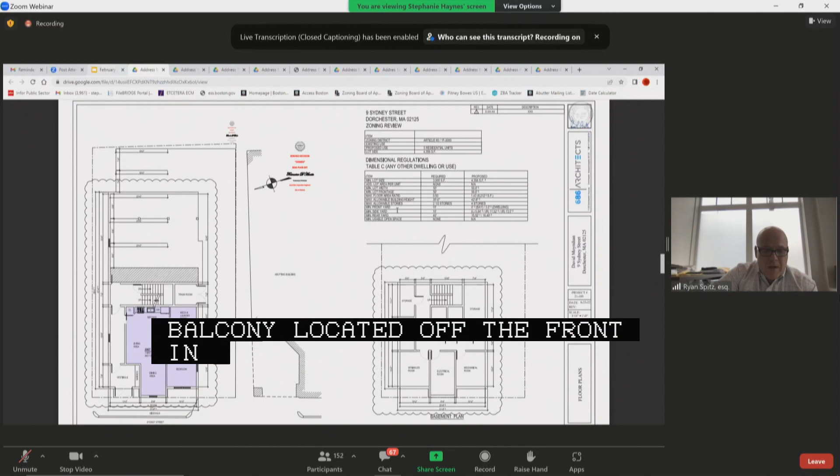The proposed FAR is 1.43, and 0.5 is what is allowed by code. The building height is excessive, proposing 3.5 stories at 42.9 feet to the ridge, which is in line with the neighboring structure to the right, also seen on page 11 of the plans. Front yard setback, we're seeking 0 feet to the bay, 3 feet to the dwelling. Side yard setback is 5.5 feet on the left and 11.5 feet on the right, compliant.

Both the front yard and the side yard were pre-existing nonconformities of the original structure. Rear yard setback, you'll notice we're seeking 15.5 feet on the left and 16.4 feet on the right, and again, this rear yard abuts the train tracks on the property. Parking will be 3 full-size spaces at 8 foot 6 inches by 20, and 2 compact spaces at 7 foot 6 inches by 18, at grade open parking, accessed by an existing curb cut. At this point, I'm going to turn it over to the board for any questions.

Thank you. Mr. Collins, have you reviewed the plans? I have. Plans are adequate. Thank you. Any questions from the board?

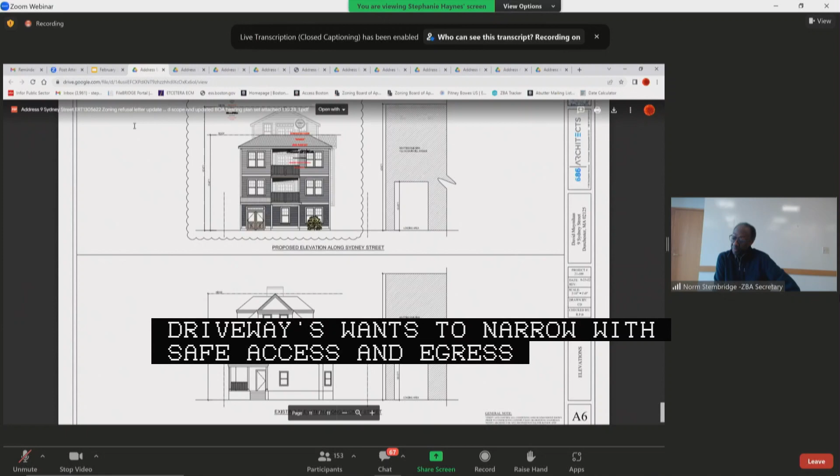Comment, Madam Chair. Yes, sir. From Bob D'Amico, that the proposed driveway is much too narrow for safe access and egress. And at the same time, we do have letters of support and opposition. Thank you. Any other questions from the board?

Is this the first time the project comes to present to the board? No, this was based upon an administrative deferral, so this is actually the first time we're presenting the plans to the board. The original filed plans were for 6 units, and going through the community process and listening to the neighbors, we've reduced the dimensions of the building as well as the unit count.

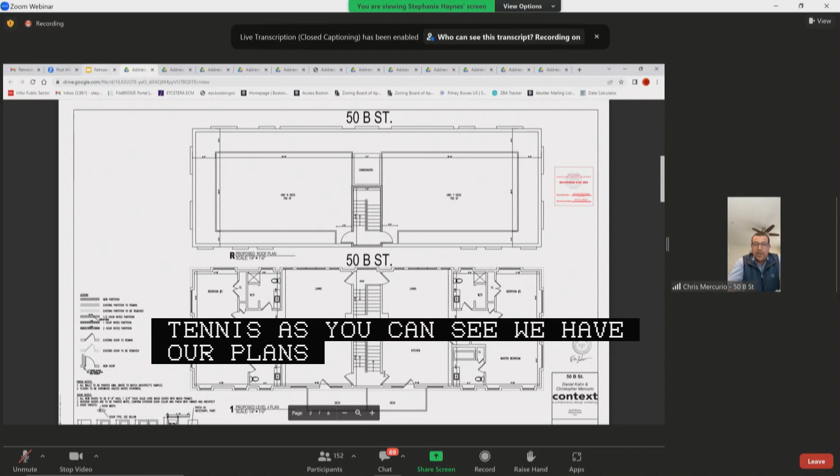As you can see, we have our plans up on the screen. This would be a private roof deck for myself in Unit 8 and Dan in Unit 7. This would just be in line with other developments in the area that are also taller than our building. So we'd just like to build in accordance with the others in the neighborhood. We're open to any questions at this time.

Can you confirm, are you doing a head house or a hatch? Currently, the design is for a head house. Okay, so as you may be aware, our recommendations are generally around hatches. Can you respond to that, whether that would be feasible? I'll defer to my architect, Eric, on that one.

Is your architect on? He should be. Eric? Oh, apparently he's on mute.

It is certainly something that we have considered. If that would make this a more amenable project, we're certainly happy to adjust the plans. We've seen in other developments in the area that there are head houses, primarily just for safety reasons. It's an easier egress point. So that would be my response to that statement.

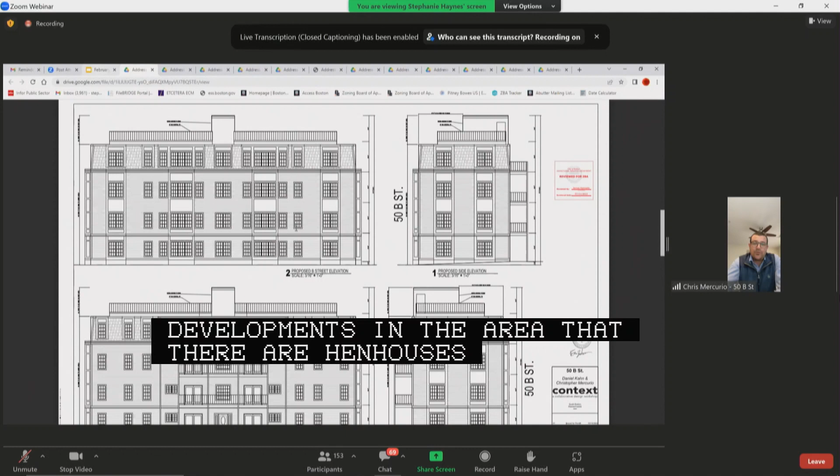Madam Chair, Eric is on. Nope, perfect. Sorry, thank you. I was running back here. So go ahead. Apologies. Go ahead. No, I was just going to say that there was a question about Eric, about the head house versus hatch. So if you wanted to comment on that, that would be great.

We discussed it initially, and the intention was to bring the common stair up and in that way comply with the building code instead of having to get a building code variance to have the roof level above the fourth floor access to be a hatch, and also to provide access to both units while minimizing the penetrations through the roof. Thank you. Any questions from the board?

Hearing none, may I have public testimony?

Yes, Madam Chair, members of the board, Connor Newman with the Mayor's Office of Neighborhood Services. At this time, the Mayor's Office would like to defer to the judgment of this board. Some background on the community process: our office hosted an abutters meeting on October 18th. It was sparsely attended. The applicant went on to the West Broadway Neighborhood Association, which indicated they were in support of this proposal. With that, we defer to the judgment of this board.

Thank you. And really quick, Connor, if you don't mind, we sent an email, Anna White had asked us to send an email to both West Broadway and the St. Vincent Lower End Neighborhood Association. So we did go through two neighborhood associations, and we had no opposition from those two neighborhood associations. Thank you, Dan.

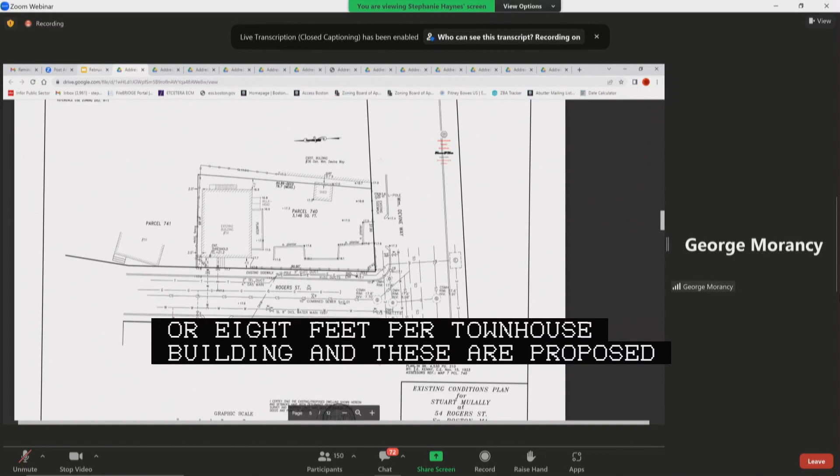My client's architect reduced the curb cut width to 16 feet in total, or 8 feet per townhouse building. As these are proposed townhouse units, there's no practical way to create a single curb cut for unified access to what are 2 independent garages. I would point out that there's no parking allowed on the even side of Rogers Street, which side this is.

My client additionally removed the projecting bay on the Devine Way side of the site for the concerns of the BPDA, and reduced the projection of the bays on the Rogers Street side by approximately 8 inches. I would point out that on the Rogers Street side, those bays project within the property line, not above the current public sidewalk. My client has also set the building back from the front lot line by over 2 feet to allow for either sidewalk widening or front yard landscaping.

The BPDA recommendation expresses that FAR here should be reduced. The zoning subdistrict here is L.5, a local business zoning subdistrict under the 1964 base code with a maximum FAR of 0.5. The vast majority of South Boston falls within Article 68 with a maximum FAR of 2. The proposed FAR here is 2.26.

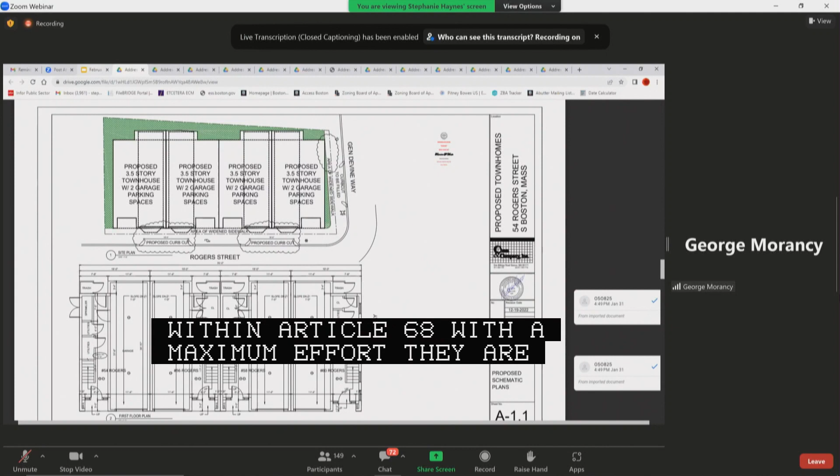Finally, with respect to the BPDA's cited Article 25 concerns, I'd point out that while Article 25 does not technically apply to this project, since it is not an Article 80 project, the fact remains that all ground floor space here is either entry space, stairs, or parking, as are allowed under Article 25.

With respect to the plans, the first floor of each unit would consist of a garage, a main entry for each unit, as well as trash storage and utility rooms. The second floor would consist of a living room and kitchen with a 10-foot by 3.4-foot porch in the rear. Each unit would have 2 bedrooms and baths on the 3rd floor. There would be a mezzanine level above, approximately 19 feet by 16 feet, which would not be visible from Rogers Street, as it would be set back approximately 16 feet from the front of the building.

Besides FAR, relief is being sought for violations owing to insufficient lot area, open space, front and rear setbacks, and building height. The height, density, and massing of the proposed building are quite consistent with other newer projects in the area, and the modal front setback on the block is actually 0. This front setback actually exceeds that by 2 feet.

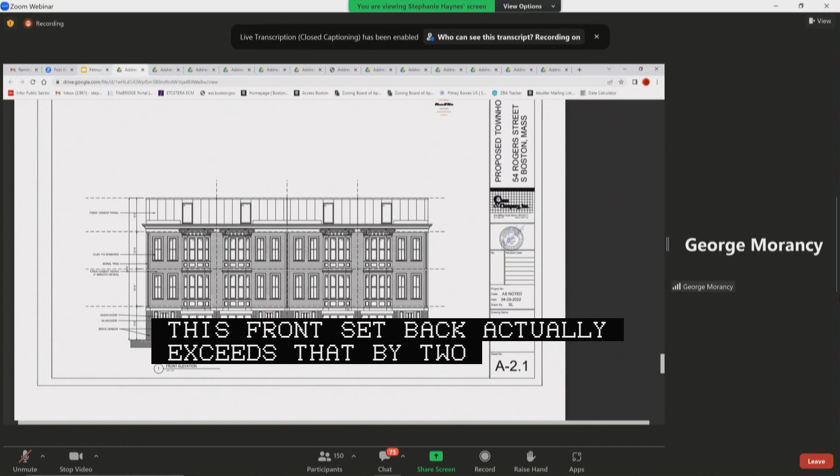There's also a site violation of traffic visibility across the corner at the intersection of Rogers Street and Devine Way. Rogers Street is one way coming down to Devine Way. The building is set back at the corner by just over 2 feet on the Rogers Street side and by just over 2.5 feet on the Devine Way side, which is fairly typical for South Boston generally and for this neighborhood in particular. With that, Madam Chair, I'll pause and take any questions that members may have.

Thank you so much, appreciate that. Mr. Collins, any questions on the plans?

I don't think so. Are you maintaining the rear setback of the existing building? So the one that you're planning on tearing down? I believe that the setback may be... I don't know, I have to take a quick look at it.

In the meantime, continue to look here. Other than that, they're adequate. They're adequate regardless, it was more of a question.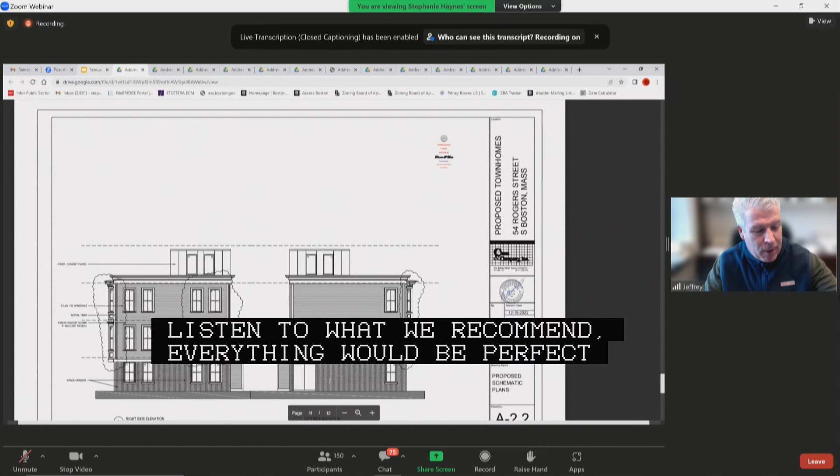Thank you, Mr. Hampton. I know what your recommendation was. Can you comment on whether Mr. Morency's client has addressed those concerns? Sarcastically, Madam Chair, if everybody just listened to what we recommend, everything would be perfect, right? Mr. Morency's aware of our recommendation, and so is the board. We appreciate the effort they made to change the project.

Just to be clear on the parking, how many existing curb cuts are there, and how many are proposed? Two curb cuts are being proposed, one for each townhouse unit garage. Currently there's no curb cut on the Rogers Street side of the building. There is a curb cut on the Divine Way side, and that one could actually be closed. It's near a hydrant, but there could actually be a legal parking space in the area of the current curb cut on Divine Way, so there would be a pickup of on-street parking of plus one.

And in answer to Mr. Collins' question, that's exactly correct, whether from Google Street View or the tax parcel viewer. It is approximately, certainly no greater than, the depth of the existing rear yard setback for the existing building.

Thank you. Any other questions from the board? No, Madam Chair, no questions, but there are letters of support on record for the project.

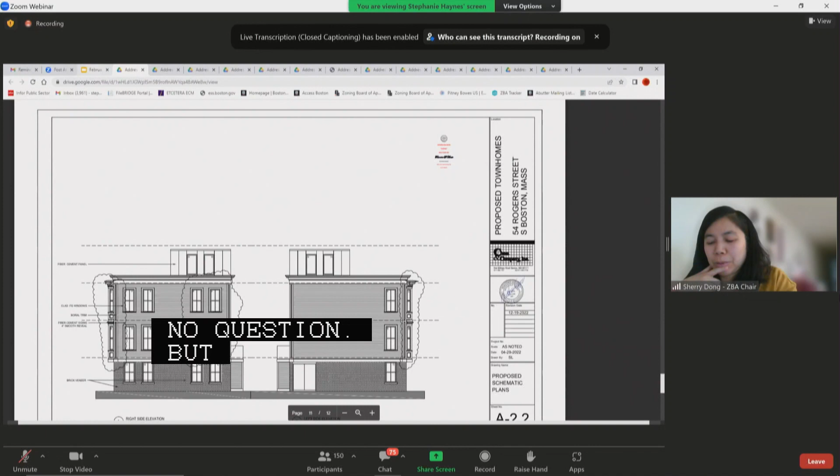Thank you, may I have public testimony? Yes, Madam Chair, members of the board, Connor Newman with the Mayor's Office of Neighborhood Services. At this time, the Mayor's Office would defer to the judgment of this board. Some background on the community process: our office hosted an abutters meeting on October 17th, which was positively received. The applicant then met with the Andrew Square Civic Association and received their support as well. With that, we defer to the judgment of this board.

Thank you. Madam Chair, members of the board, Ana Calderon from Council President Flynn's office. The councilor would like to go on record in support of the proposal for 4 townhouses and 8 total parking spots, with room for trash storage, due to a thorough community process and feedback from neighbors and the Andrew Square Civic Association. Councilor President Flynn respectfully requests that the proponent continue to work closely with the neighbors during the construction phase and on the placement of tree canopy.

Thank you. Madam Chair, members of the board, Paul Sullivan, City Council at Large, Michael Flaherty, echoing sentiments of Council President Flynn's office, Councilor goes on record in support.

Thank you. Any other raised hands? Yes, Madam Chair, sorry about that, I have one raised hand. Okay, thank you.

Hi, Andrew Square Civic Association, you've been unmuted. Good morning, Madam Chair, John Pikatowski, lifelong resident of Andrew Square, co-chair of the Andrew Square Civic Association Development Committee. Mr. Mullally and his team have had discussions with myself and the full ASCA board, working to address our concerns and abutters' concerns, some involving the listed code violations. We're pleased with the amendments made to the 5460 Rogers Street proposal. We hope to have continued engagement with the developer, and we'd like to go on record in support of this proposal. Thank you, sir.

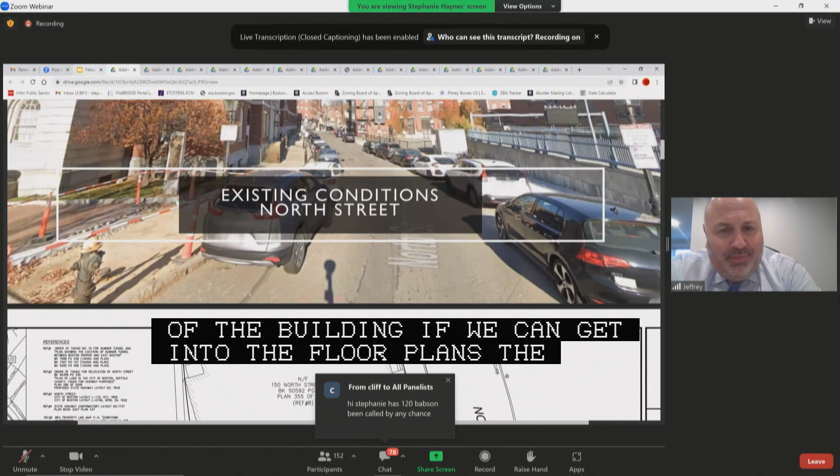If we can get into the floor plans, the basement level would house a gymnasium, living area, and 2 bathrooms. The first floor would house, as I had mentioned, the garage, accessed through the front on an existing curb cut, and then entered on the side, which you can see here on this site plan.

The first floor would also house the main entry of the building, sitting area, 1 office, 1 bath, and a mezzanine level family room. The second floor of the existing building would house the living room, kitchen, pantry, dining room, another office, and 1 bathroom. Then the third floor would house the bedrooms, 3 bedrooms, 3 bath, with an office and laundry area.

The roof deck is existing on the building up by the pergola on the top floor. We would just be renovating that. We would not be adding additional square footage to that.

Just to point out, the zoning violations are minimal. This particular district actually allows for multifamily residential or multi-unit, but Mr. Lapoli is choosing to keep this for his own personal residence. So, in fact, one family is actually a conditional use. Multifamily is allowed. And then the other violation is just on the ground level. It only would be limited to lobby space for some kind of commercial use. And because this is residential only, we were cited for that as well.

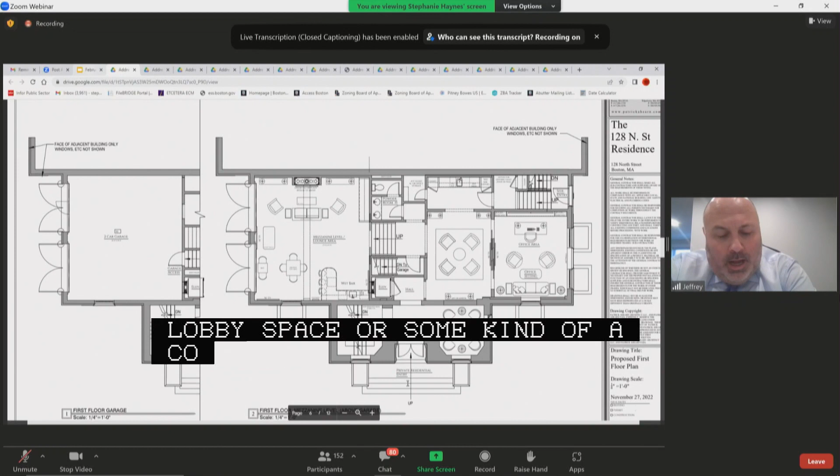Again, we worked extensively with our neighbor, the North Bennett Street School, to come up with a very detailed construction management plan, which our team and their team put together as we went through this proposal, which addresses everything from trash to noise level to rodent control, even though this project is all going to be worked on within the interior of the building. This building had sat for a number of years idle, neglected on the inside. It was used as office space, Mass DOT, Greenway, and we really want to refurbish the entire inside and make this a great place for the family to live.

I can pause at this time and answer any questions that the board may have.

Thank you, Mr. Drago. So just a quick question, you'd be adding a curb cut to the side of the building? No, Madam Chair, there's an existing curb cut. If you go to the 3rd page, there's a site plan on the property. Mass DOT actually uses that right here. You can see if you go down a little bit, there's an access point now. That would allow for complete access. That would remain to the front of the building, and there's one more to the side where the parking would be located. Perfect, thank you.

Mr. Collins, any questions on the plans? No, drawings are adequate, thank you. Any other questions from the board? No.

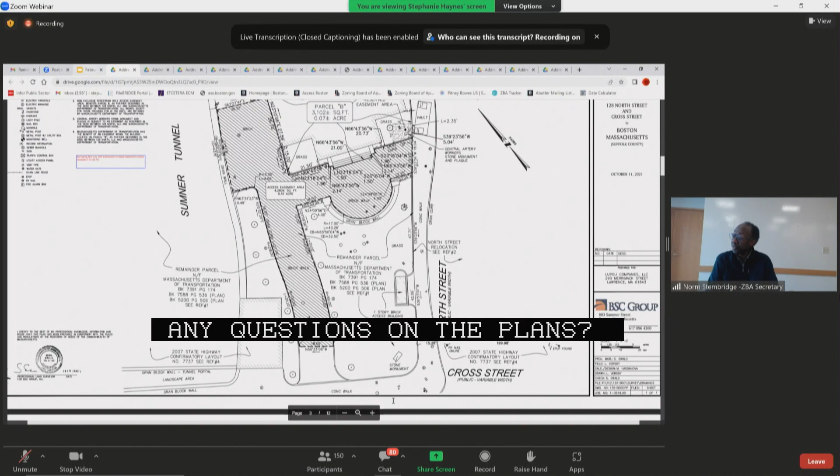Yes, Jeffrey, is this property or was this property part of the DOT building? Is that a new acquisition from the DOT? What is the deal with the property? So this was formerly owned by the Mass DOT. Over years, it was leased out to different state and city entities to rent the inside. An RFP process went out. My client purchased the building but let the existing Greenway tenants stay in there for a number of months while they could find another location. But he does own the property.

Thank you. And all the green space or the outdoor space, is that part of the property now, or is that going to be part of the DOT property? So that would remain to the DOT and the public. Mr. Lapoli would have easement access rights to enter the garage and the front of his building, but that would remain right now by Mass DOT. And so there is public access to that green space? Correct. Okay, thank you.

Okay, may I have public testimony?

Francis? Yes, Madam Chair. Elaine? Good afternoon, Madam Chair and members of the board. Councilor Coletta has received a letter of conditional support from NEWRA and has reviewed the letter of commitment the North Bennett Street School had shown her. The councilor would like to go on record in support of this proposal. Thank you.

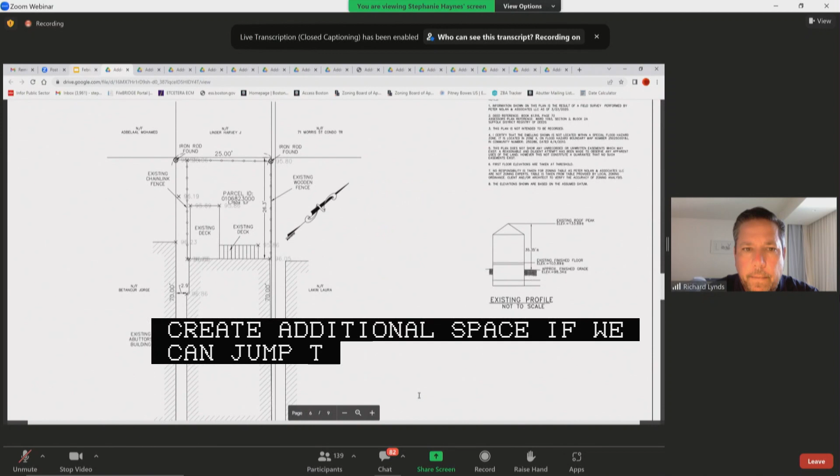Our existing site plan shows the building itself. As I mentioned, we aren't proposing to change anything with respect to the footprint, so there are no additions proposed to the rear. Any of the existing nonconformities that presently exist on the site are not changed except for what is in the interior.

Our program for the lower level basement renovation is on the right-hand side. We don't propose to make really any changes to the 2nd and 3rd level—those are the existing 3-bedroom units already on the site. There are some small changes with respect to the 1st level to allow for access into the lower level as well. I do have Eric Zackerson as the project architect here, who can answer any specific questions on the design.

With respect to the zoning, I can run through the relief being requested. This property is located in a 3F 2000 district. It does allow for 3 families as a matter of right, so the current use is conforming. However, the change to 4 would create a multifamily residential use, and because that is forbidden under Article 53, we are requesting a variance for that.

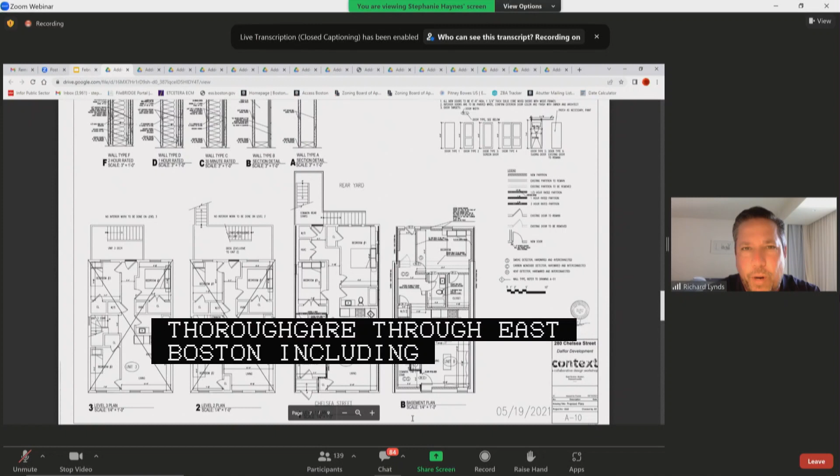I would point out this neighborhood is pretty dense and does have a lot of multifamily uses in and around Chelsea Street. Chelsea Street is a main thoroughfare through East Boston, and I like to make reference to this because we've been involved with the Plan East Boston project for some time. Multifamily residential is a use being contemplated at the new zoning change for this neighborhood.

We recognize that this addition to the lower level is in the Coastal Flood Resiliency Overlay District. While we're not subject to that with respect to this project, I understand the BPDA generally has concerns about that. But I would assure the board that this project is not in a flood zone, and therefore any modification at the lower level would be permitted under our code. Again, I recognize the BPDA's position when it comes to coastal flood resiliency.

With respect to the other items for which we require a variance, because this space, although existing, would be changed to habitable space, we do increase the FAR. The current FAR is 1.27, which is already a non-conforming condition. The increase would bring us up to 1.95, so we do require a variance for that additional FAR.

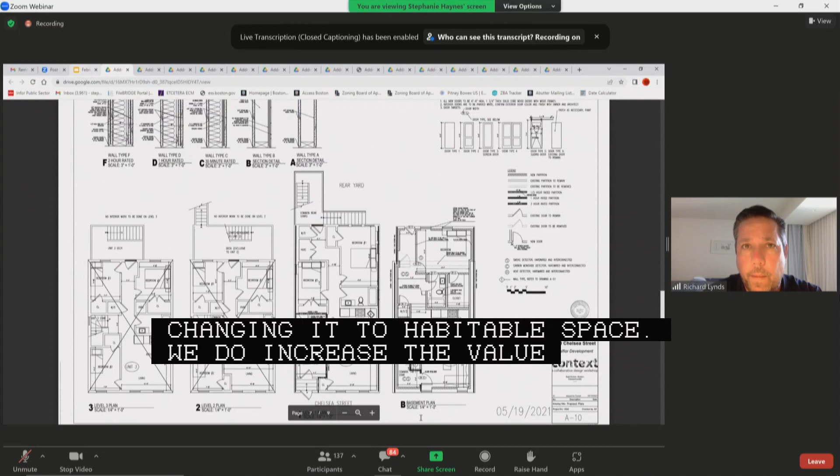Because the current makeup of the property with respect to usable open space is non-conforming, the addition of a dwelling unit, although there is no change in the footprint of the building, does create additional need for usable open space. We're not proposing any roof decks—I know roof decks tend to be somewhat controversial in this section of East Boston, so we don't propose to add that. We do propose, however, to have rear decks for each of the units and some outdoor space for those lower level units as well. So we do feel that the open space issues can be addressed.

With respect to parking, because this is a pre-existing use at 3 units with no parking currently on the site, the zoning code requires that we only add 1 parking space for the additional unit we're proposing. Because that would be probably impossible given the way the building sits on the site now, we are requesting a variance for the parking. We also think that's for good purpose, because we're very cognizant of BTD's position with respect to introducing curb cuts for private parking spaces when we're not proposing any more than 2 spaces that we need. So in this case, we think a variance would be appropriate rather than taking away on-street parking, assuming we could even create parking for off-street use.

With that, I'll pause, and if there are any specific questions on the plan or the relief we're seeking, I'm happy to answer that.

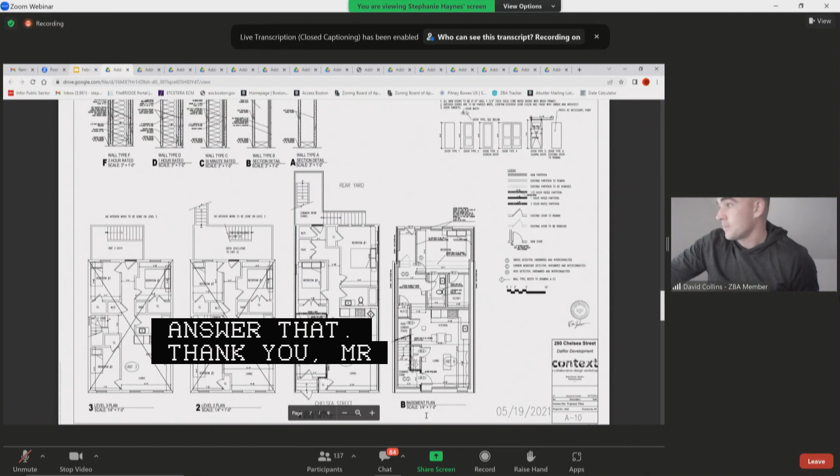Thank you, Mr. Collins, any questions on the plans? No, plans are adequate. Okay, can you address the BPDA mentions coastal flood resiliency overlay district issue?

I'm sorry, you'd like me to address that, Madam Chair? Yes, it's a question for you. Oh, I thought you were asking Mr. Collins that. I apologize.

We've done a lot of work at East Boston and are very familiar with the overlay district requirements, certainly on Article 80 size projects where we're adding at least 20,000 square feet or 15 or more units, compliance with coastal flood resiliency design guidelines is necessary. It's not necessary for a project of this size because we're simply adding 1 unit to an existing 3-unit building. So while we can attempt to achieve some of that in design review, the real issue is whether or not we're in a flood zone, which we're not, and whether or not we have to comply with flood regulations for our design to work. We take the position that that's not the case here.

Any questions from the board? Okay, may I have public testimony?

Good afternoon, Madam Chair, members of the board. Natalia Benitez with the Mayor's Office of Neighborhood Services. ONS hosted an abutters meeting for this project on July 6, 2022. No abutters were in attendance on the call. The applicant also met with Eagle Hill Civic Association in September and October of 2022. The association voted to oppose with 9 members against it and 8 in support. Some concerns over parking were raised, no major concerns with loss of basement space because all units are small rentals, and they also stated that the yard has enough space for storage of trash and more. At this time, our office would like to refer judgment to the board.

As the slide deck is loading, I'll give a quick overview. This is a proposal to demolish an existing single-family dwelling on Chelsea Street, very close to Day Square in East Boston. Our proposal would include the construction of a new 4-unit residential dwelling, and I can walk through that once the plan populates on the screen. The bedroom sizes for each of the units would all be very generously sized 2-bedroom units or 2-bedroom plus units, approximately anywhere from 1,200 to about 1,300 square feet.

The lower 2 levels would be flat style units, with the upper 2 levels being bi-level, sharing the 3rd and 4th level. We don't propose any basement.

Probably a good opportunity to talk a little about flood. This particular site has a portion of it located within the flood zone, and therefore we are building this with respect to compliance as it relates to flood design guidelines.

We do propose roof decks as well. Those would be private for the upper level units. And we're also looking to access those by hatch, not by head house.

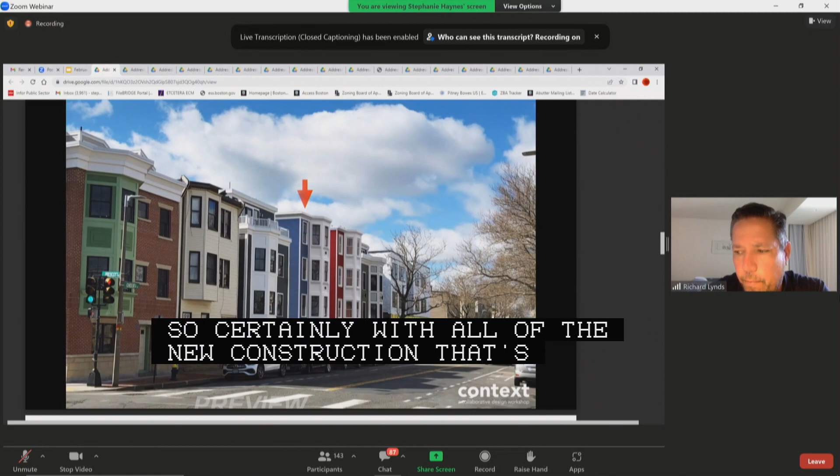We require a variance for the floor area ratio. The 1.0 that is allowed in the district would be exceeded, and therefore a variance request to allow for 2.86.

The height of our building, and again, very important that we include this rendering, while it would be consistent with the buildings both left, right, and in that section of Chelsea Street, we are about 8 feet above the 35-foot height limit that is permitted, so a variance would be necessary for that as well.

With respect to open space, we do include roof decks and some balconies, and therefore we would be providing available open space for the property. However, we'd be below the 300 square feet that is required, and therefore a variance would be required as well.

Our rear yard setback is about 11 feet. We do require, even though this is a shallow lot condition, about a 20-foot setback. I'd point out that the current conditions of the existing house and decks actually go all the way back to the rear property line. So during demolition, we'd actually be creating an opportunity for some open space in the back, used in connection with creating a courtyard or a bit of open space for the lower levels of this building. Last but not least is parking.

With respect to parking for this site, the zoning code calculation would require a total of 5 spaces. As I indicated, this is within a very short walking distance of Bremen Street Park, which has an entranceway to Airport T Station. We're also within a short walking distance to Wood Island T Station. While I know parking always tends to be a concern in the neighborhood, we feel this particular location presents a great opportunity for additional dense housing located in very close proximity to public transit.